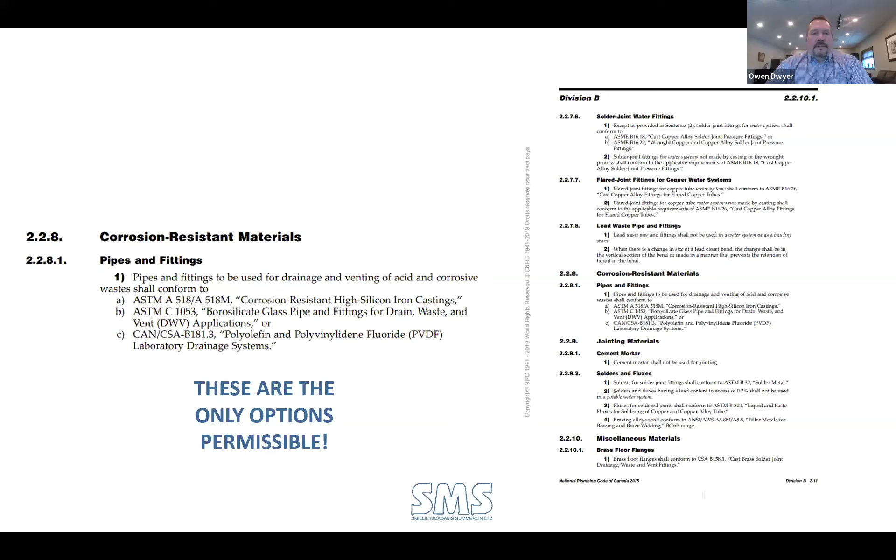Great, thanks Mo. So just to jump right in, what does the code say with respect to corrosive waste in our national code? Essentially, on the left-hand side is the blown-up version. In our 2281 in Ontario, it's 7281. But essentially, it says pipes and fittings that are going to be used for the drainage and venting of corrosive waste shall conform to, and shall in our code means must.

So A is the silicon iron castings, that's a material. B is ASTM C1053 borosilicate glass, and C are your CAN/CSA-B181.3 plastics, so your polyolefins, your PVDF material. Full stop - those are the only permissible options if you are doing a DWV system here in Canada that has corrosive or acid wastes. Again, A, B, or C, and I'll reference A, B, and C in future slides.

Venting also elaborates into venting in 2553. Venting for drainage or dilution tanks that are conveying corrosive waste shall extend independently and terminate in outside air. See Article 2577, I'll get to in a moment. This section points to the separation of corrosive waste from your sanitary system. At one point, you used to be able to tie your corrosive waste vent into your sanitary, but what they found is that your corrosive vent would just condense again into liquid form once it was inside the stack, and it led to further corrosion. So at this point, if you are venting corrosive waste or your dilution or neutralization system, they terminate in outside air.

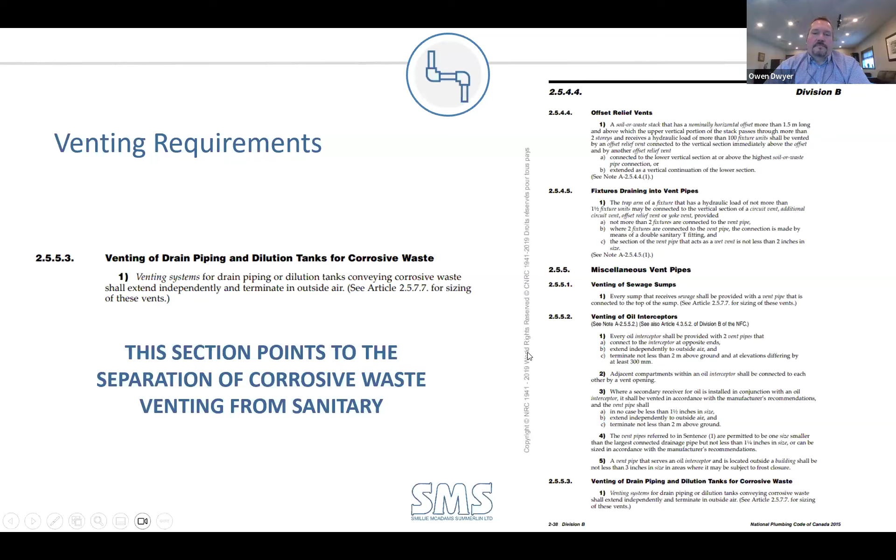2577: venting for sewage sumps, dilution tanks and neutralization tanks are used interchangeably within the code. They are considered to be the same thing. I'm going to go through why they shouldn't be considered the same thing, but for the purposes of discussion, if you see dilution tanks in the code, it's referencing neutralization as well. The second point is the most important: the size of every vent pipe in a sewage sump or dilution tank shall be not less than 2 inches and does not need to be greater than 4 inches. So there is no 1.5-inch venting. You do have to vent a neutralization or dilution tank, and vent sizing is stipulated there.

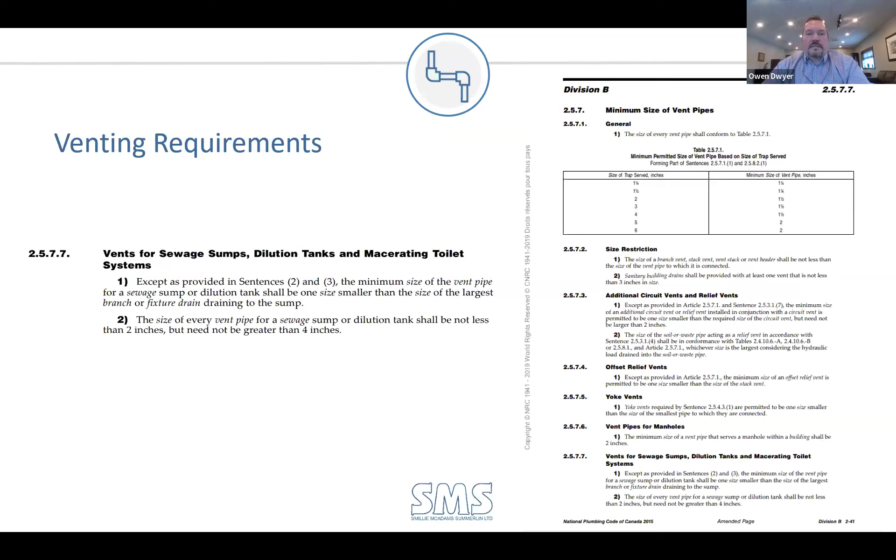So again, referencing back to those A, B, C types of pipe that were selected or referenced at the beginning of 2281.

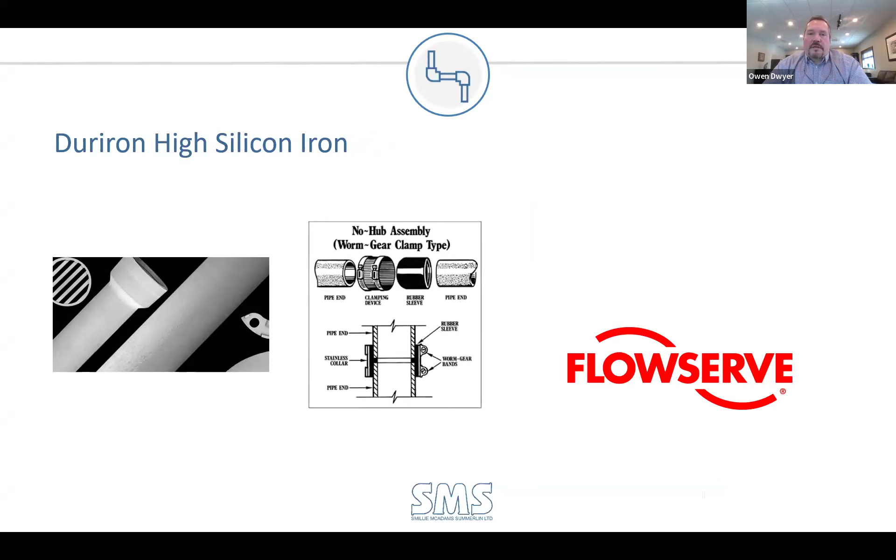Duriron is a product you may know if you've been in the industry long enough, where you've come across it in older master specs. Flowserve was the corporation that produced this material, somewhere in the northeastern US. It was a no-hub style connection system that kind of looked like cast iron, but it had additional silica sand in its recipe, giving it the ability to withstand more chemicals. Unfortunately, or fortunately, in April 2016, it was discontinued.

It was the inception product almost 100 years ago. Again, with that additional silica sand in the recipe, it gave it the ability to withstand corrosion. It's no longer available, but as you can imagine, like a dinosaur bone, every once in a while they get dug up on an old job site, and now we can't add to the Duriron system.

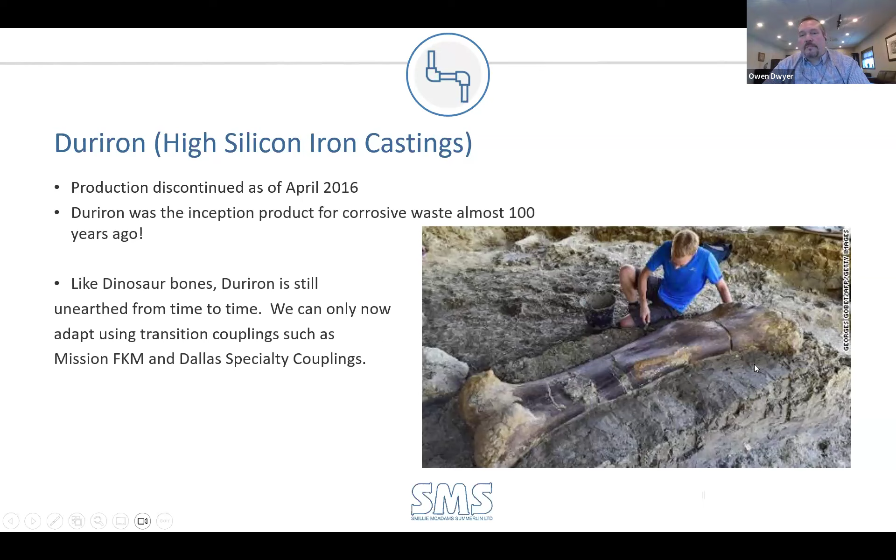We now have to adapt to those. So using transition couplings such as Mission FKM or Dallas specialty couplings, we can do those transitions and still be code compliant.

So B of that A, B, and C is borosilicate glass. It's under the non-combustible piping umbrella, similar to copper, cast iron, any of your metals in a building. So it comes with its set of fire stopping traditions and whatnot.

But the acid waste borosilicate glass, most people don't know, is made by skilled tradespeople. So unlike cast iron that comes out of a casting, or plastics that come out of a mold, every single glass fitting is made by a skilled tradesperson.

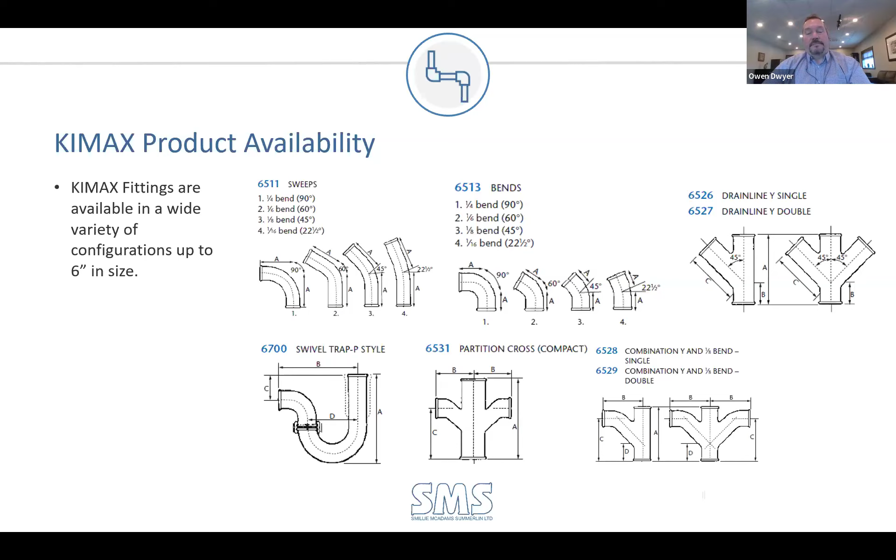They'll take a small section of glass pipe using heat by a torch and jigs. They will bend 90s, 45s, and using carbon rod, they will make the shapes required for a standard plumbing system, be it a TY or a 45-degree elbow, et cetera. So there's some cost involved, and we'll talk about unit value comparisons later on.

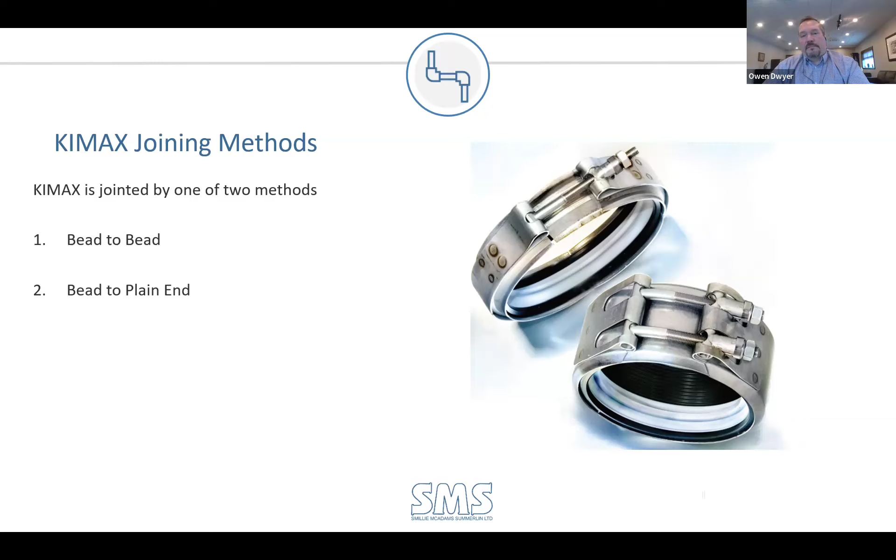The way glass is joined is with a stainless steel kind of jacketed fitting, and the white part you see in those two fittings is Teflon. And if you can see from the next slide, there's a bead to bead coupling and a bead to plain end style coupling.

So what does that mean? All the pipe ends are beaded, or the fittings are beaded, and that's where you would use a bead to bead coupling. For example, if you're cutting a piece of pipe, they come in 10-foot and 5-foot lengths, so a field cut is going to have a plain end now. The bead to plain coupling is what you would use in that scenario.

Because glass and other materials I'm going to talk about shortly, polypropylene and PVDF, are made to iron pipe size, this bead to plain coupling can also be used as a transition fitting.

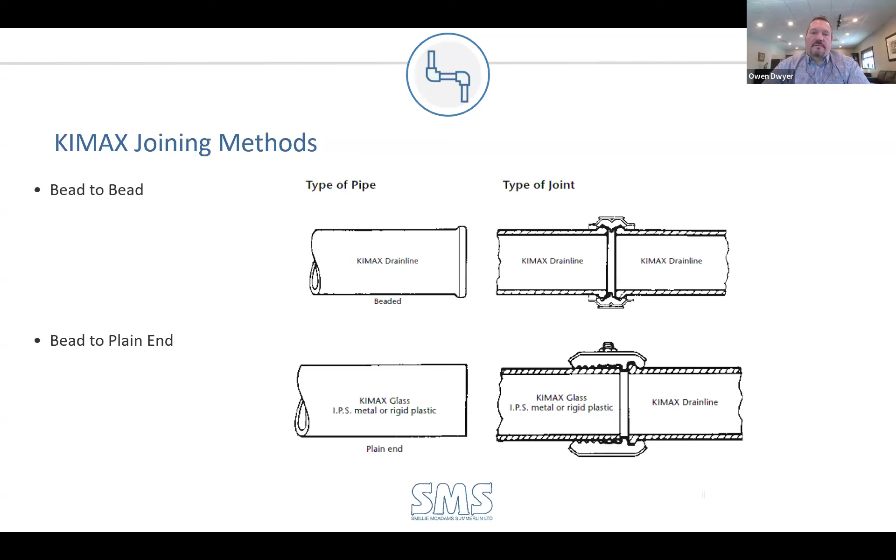So we've covered the A of that 2281 of A, B, and C. B is the borosilicate glass. A is the Duriron product that is no longer available. Just to note, if you look through your master spec and you do have Duriron listed, take it out, it doesn't exist anymore. You're going to create some problems for yourself.

So what's left is borosilicate glass and the CSA 181.3 polyolefins that fall under that C bullet point, if you will. So plastics, those plastics for corrosive waste.

Back in the mid 1990s, plastics were introduced into this corrosive waste. And as we know, plastics are considered combustible. Some special provisions had to be made to accept or allow polypropylene in combustible applications, and those are pointed out in this next slide.

31516, this is specific reference to the OBC, but it's also in the national codes as well. So 3.3 here that's highlighted: polypropylene pipes and fittings are permitted to be used for drain, waste, and vent for the conveyance of corrosive waste, and to distribute distilled or dialyzed water in a laboratory or hospital, provided that the building is sprinklered.

So if you're doing an older building that is a retrofit and it does not have any sprinklers in the building, polypropylene is not a permissible product for a corrosive waste application under that scenario.

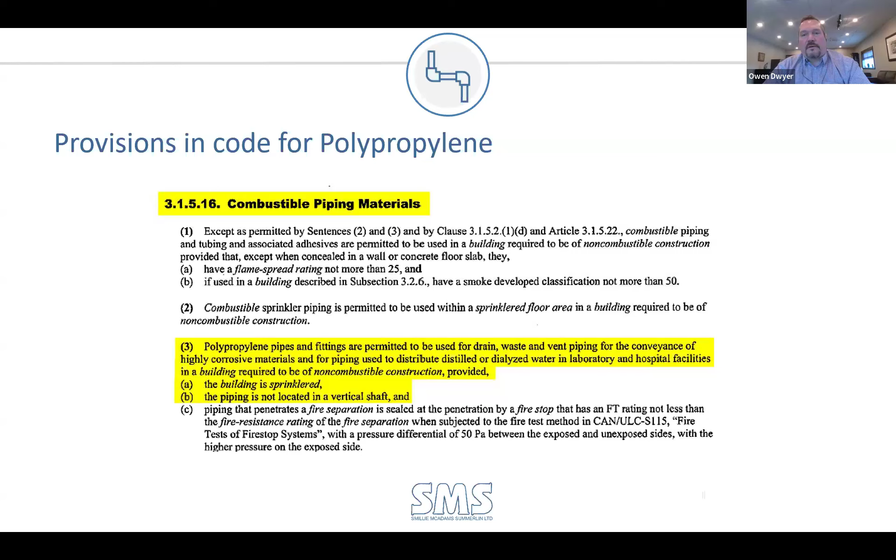So there's various plastics, various plastic manufacturers, different bells and whistles, how they go together. Unlike glass, where you have a bead to plain or a bead to bead, in the plastics you range from different materials like polypropylene or PVDF. I'll touch on PVDF shortly, but you have different manufacturers with different joining methodologies.

One thing to note in your spec is just to say it must comply with CSA 181.3. That's kind of the catch-all for all parties in play. I'll just go through real quick on the systems. So polypropylene, you're typically talking about a flame retardant polypropylene.

Just to drop some trade names, IPEX trade name for that would be either Enfield or Labline, regardless of their joining method. You would have a Watts system, which would be either blue line, their non-flame retardant would be brown line. So be careful of using those trade names in your specifications, because you're going to knock out other viable products.

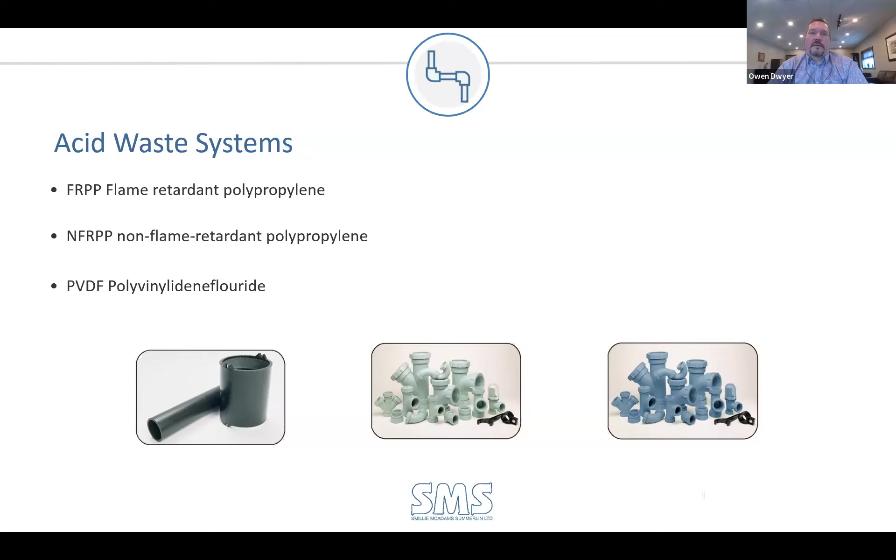Again, I reference that 2281 standard that spells out CSA B181.3. And finally, PVDF. PVDF is a thermoplastic as well that carries properties similar to, if you're familiar with PVC XFR from IPEX, for example, it meets flame and smoke. So if you have an application where you did have a flame and smoke requirement, going back to the analogy of a building without sprinklers, if you wanted a plastics option, PVDF would be the only requirement left on the plastics option for corrosive waste or glass.

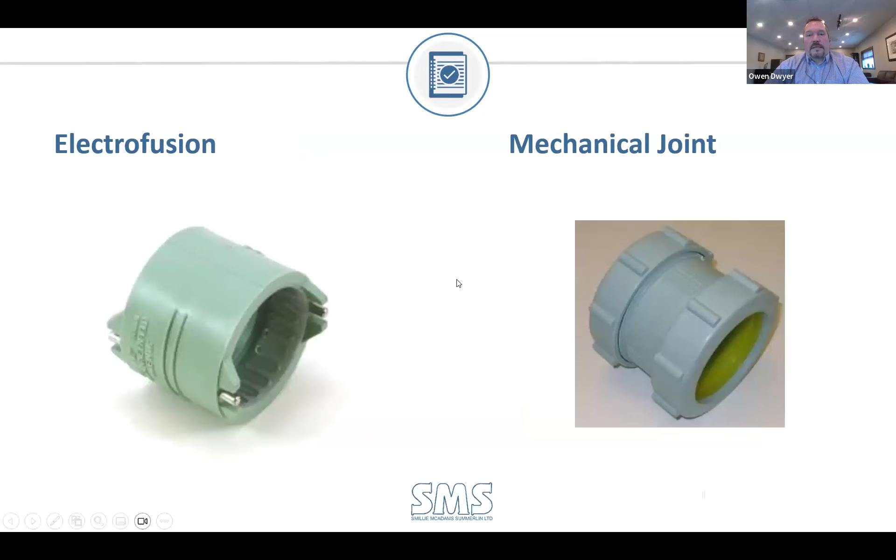So in most systems, you have either a fusion or a mechanical joint. Fusion is predominantly what's used for below grade applications. Mechanical joint is typically for your below the bench, accessible areas, for obvious reasons, but it's recommended to go with fusion for the maximum extent possible. And again, I just wanted to point out that we're only talking drainage here. This is not for the conveyance of chemicals in a pressure application.

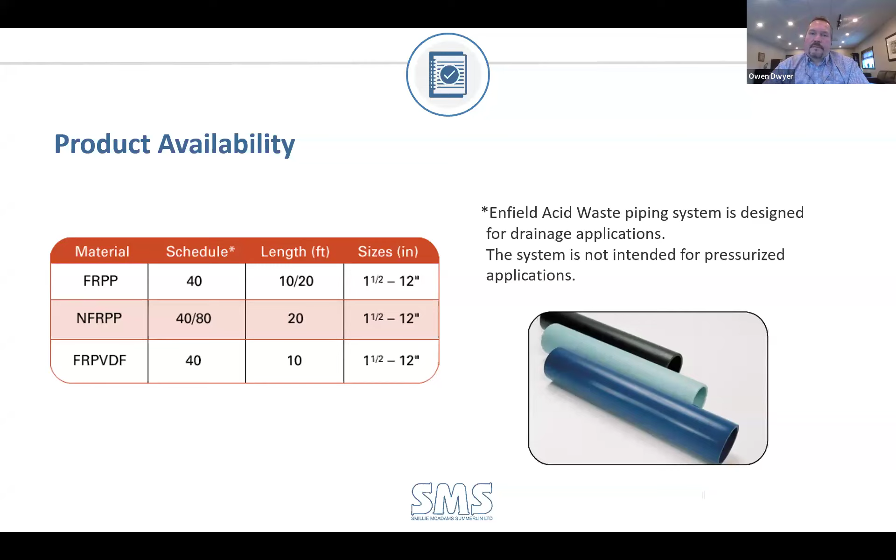Most manufacturers list their products available from 1.5 through 12. Some manufacturers list up to 16, but again, not very common, and that's likely a fairly long lead time coming from Europe, likely.

Unit value comparison: if glass was our control factor with a unit value of 1, that PVDF product would have a unit value of about 0.75, and polypropylene 0.35. So that said, in your specifications, you should try to look towards polypropylene as the viable option for the situation, taking into consideration chemicals, temperatures, sprinklered buildings, plenums, etc., just based on cost value alone, and then work from there.

You can see why the Duriron went the way of the dodo bird over the years. It's 3.5 times that of glass, or 10 times more than the available polypropylene plastics options today. So again, just for quick math, if you've got $1 million of pipe and fittings in a glass project, that's a $350,000 comparable takeoff in polypropylene.

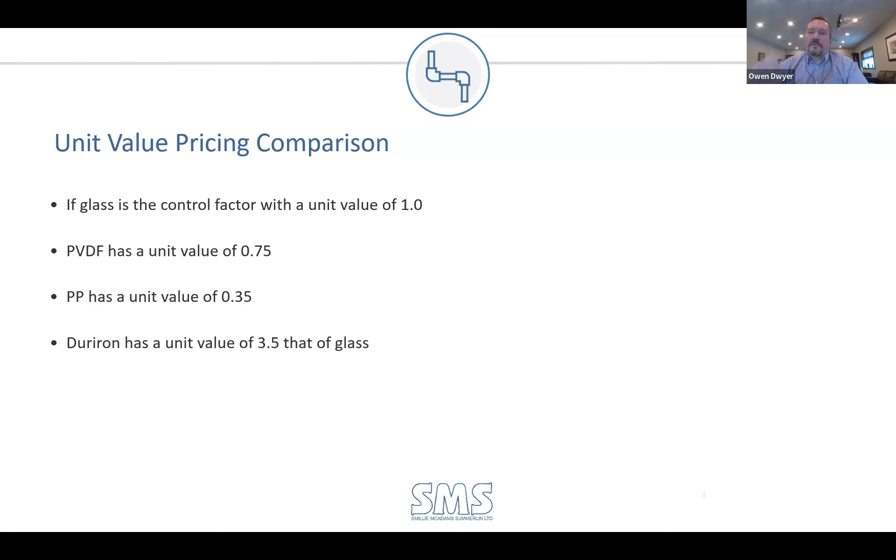As far as ticking those boxes, you're trying to produce a viable solution for a client. Polypropylene should be the first product that you consider. Also taking into consideration plenums: plenums would be PVDF and glass, not polypropylene. Sprinklered buildings would permit polypropylene. Unsprinklered buildings would not permit polypropylene. So then again, you're left with PVDF and glass as your only two viable options.

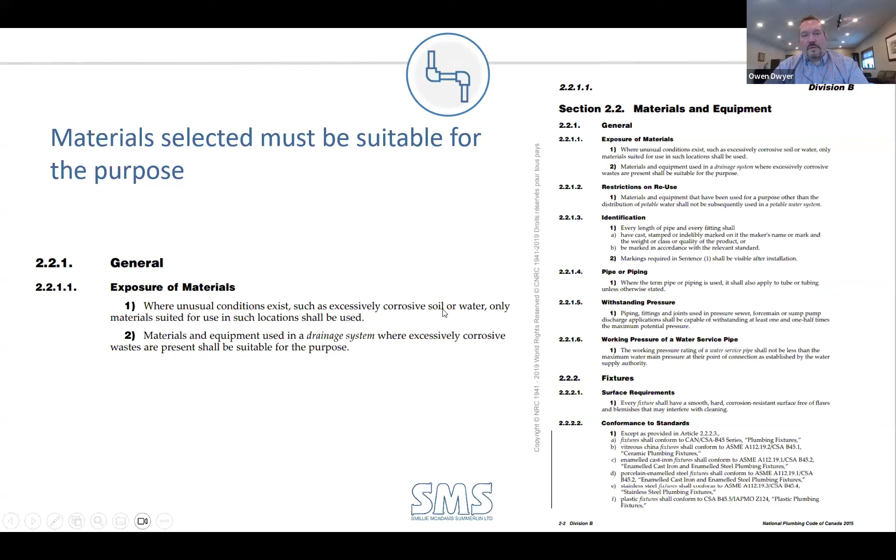So, corrosive waste. It talks about all of the A's, B's, and C's that we went through. But in 2281, as a general catch-all in our code, it talks about materials and equipment shall be suitable for the purpose, which makes sense. So at no point do you put glass connecting to a PVDF product and then use a standard Fernco coupling, like a standard rubber jacketed coupling, in these applications. Everything has to be suitable for the purpose, as per 2211.

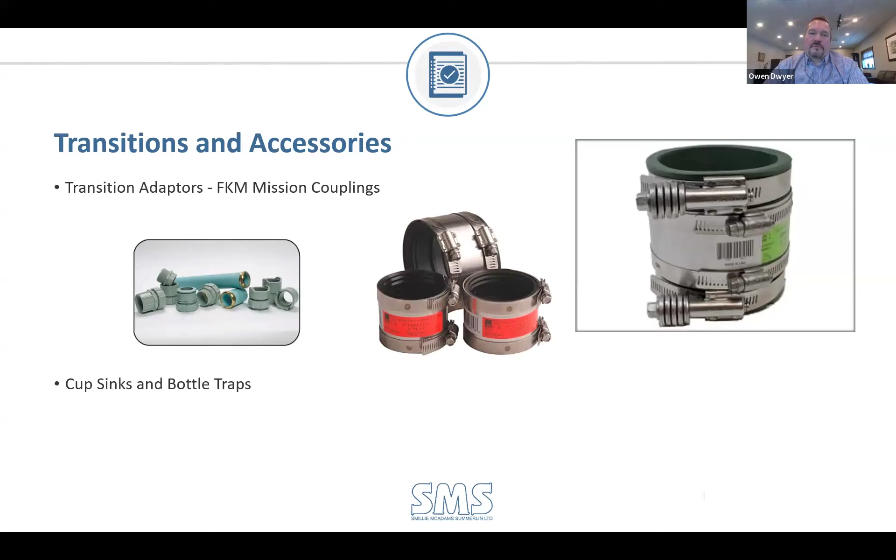The proper transitions are similar to what I mentioned before, like a mission style coupling, a Dallas specialty coupling. There's specialized rubbers that are used in high temperature and chemical applications. Make sure it's suitable for the application. And just in general, there's other accessories available like tailpiece adapters, cup sinks, bottle traps, etc.

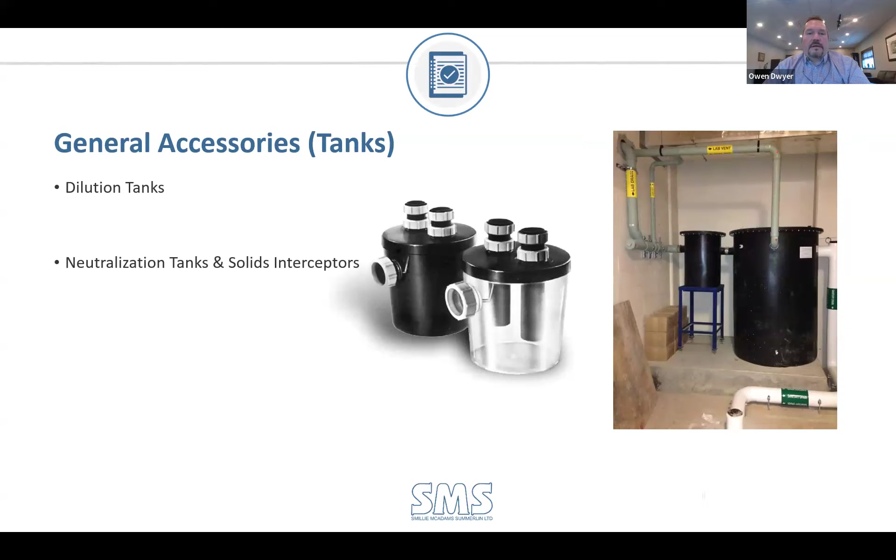Staying on the general accessories, you have smaller tanks, you have larger systems. Neutralization systems are a requirement, solids interceptors, and pH monitoring. So the next part of the presentation is going to go into the neutralization part.

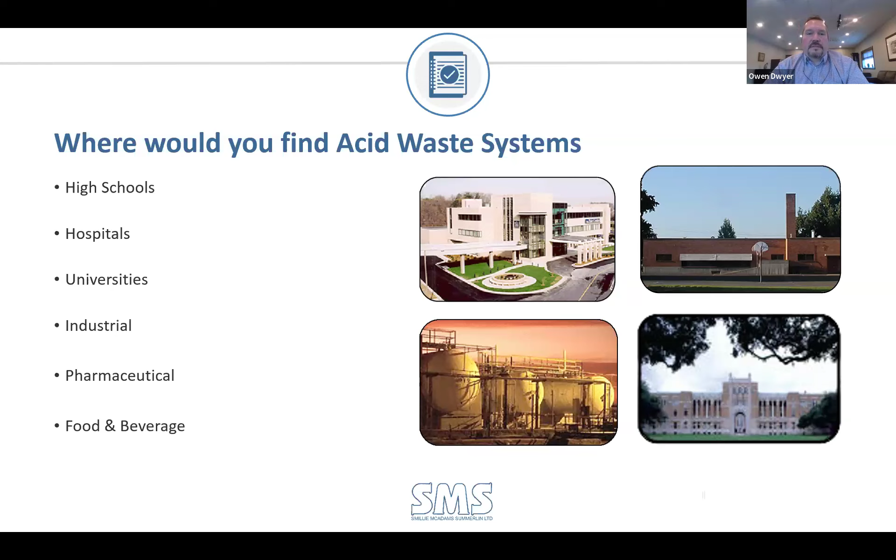As a kind of a shock, there's not much to say in our code with neutralization. So that's kind of the meat and potatoes of this presentation that I'd like you to take away with you today. Where do you find these corrosive waste applications? Typically high school laboratories, hospitals, research type university facilities, industrial pharmaceutical applications, and food and beverage. Anywhere where you've got an excessively corrosive DWV system that's connected to sanitary, these are the applications.

So why do you need to use it? Because it's a requirement, a shall conform to A, B, and C. These are your three options: polypropylene, PVDF, or glass. You have a complete product line where it's combustible, non-combustible, plenum, shafts, etc. Chemical resistance, all of that needs to be taken into consideration. Again, reiterating 2281, shall conform to A, B, and C. You can't use stainless. You can't use CPVC. You can't use PVC, or whatever other material that somebody is proposing that you should consider. Our code is pretty black and white when it comes to DWV applications for corrosive waste.

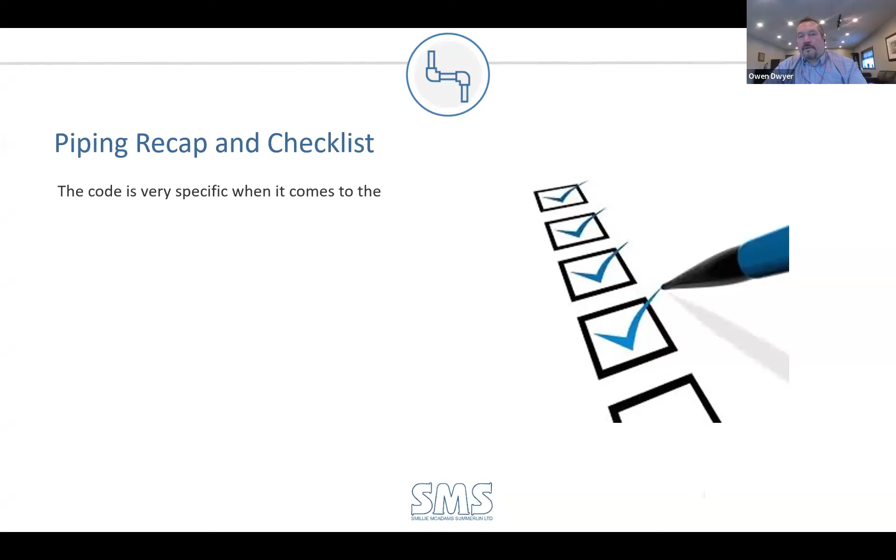So the neutralization part of the presentation - how am I doing for time? Good. It's quite important, so I'd like to spend a little more time there. That's why I'm not rushing through. As a quick review on piping, it's very specific when it comes to requirements for corrosive waste.

2281 covers your A, B, and C pipe requirements. 31516 talked about the combustible pipe restrictions and the provisions made for polypropylene in a sprinklered building.

3643 talks about plenum requirements, that's flame and smoke. For venting, 2553 talks about venting independently into open air - you don't tie into sanitary. Vent size requirements: shall not be less than 2, need not be greater than 4 in general, as well as for your connections to your neutralization dilution tanks.

Any plumbing system also takes into consideration vertical shafts, fire stopping, slope, etc. So in the grand scheme of things, all of that is standard fare for a corrosive waste system. You just have to make sure you're selecting the right material of the three - polypropylene, PVDF, or glass - for the application, again considering plenums, shafts, chemicals, temperature, etc.

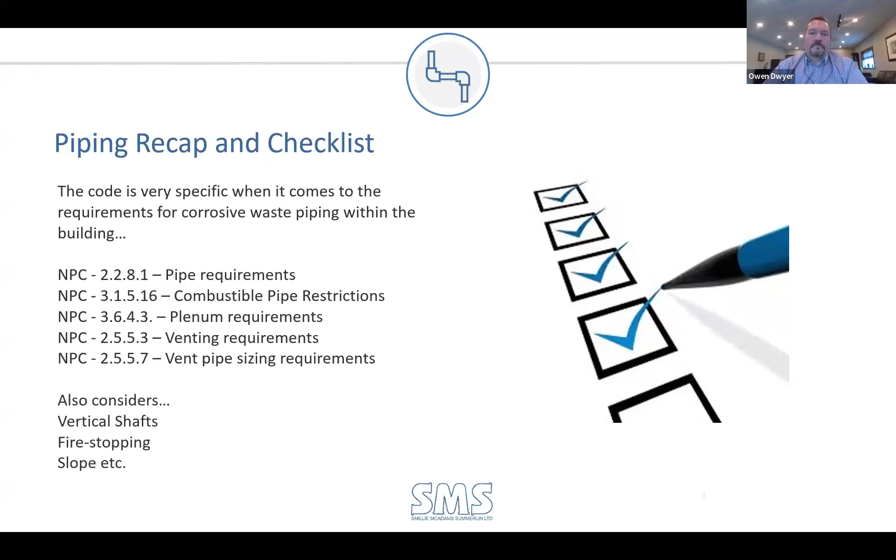So as I mentioned, when it comes to neutralization in the code, this is what we're given. In 2444, where a fixture or equipment discharges corrosive or acid waste, it shall - in the code, shall means must - discharge into a neutralization or dilution tank that's connected to the sanitary drainage through a trap or an indirect connection.

Part 2 is what I've always banged my head on the wall about: neutralization and dilution tanks shall have a method for neutralizing the liquid, period. It doesn't give you anything, no references to anything. The important point is there is no standard - no CSA standard or anything that these manufacturers have to conform to.

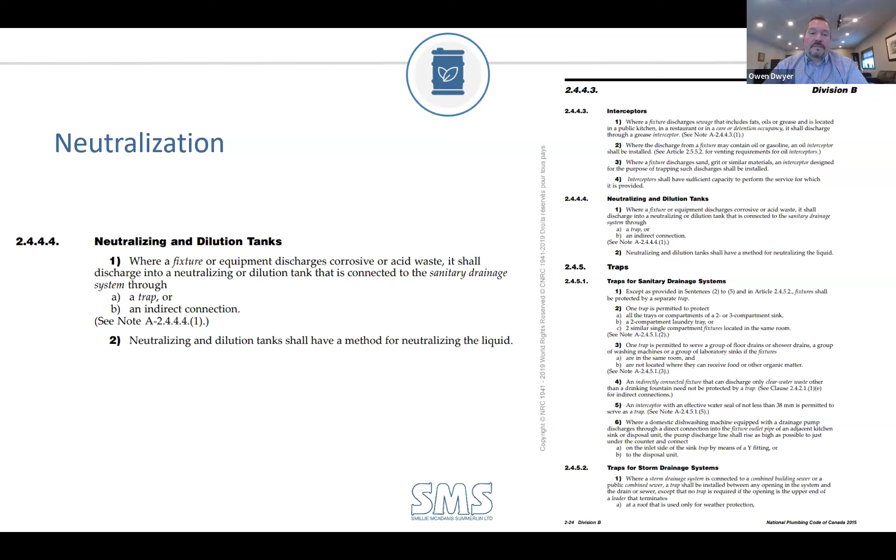So what does that mean for all of us? These are engineered and engineered design systems. So it's up to us in the industry to make sure these tanks are designed for the application at hand.

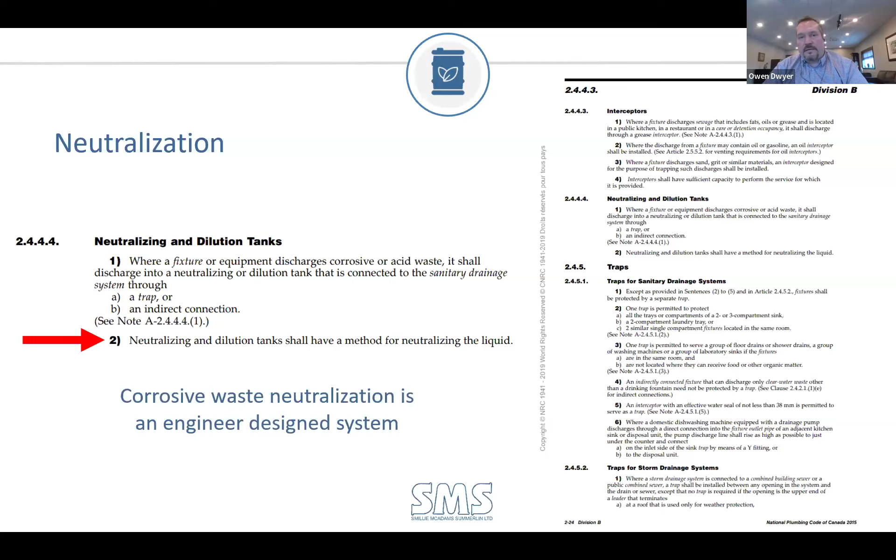So let's pull back a little bit. What is corrosive waste? It's set by sewer use bylaws. Every municipality has a specific bylaw with respect to permissible discharge limits, be it temperature, solids, chemicals, and whatnot - anything that's going to be harmful or detrimental to the aquatic environment, to persons and so on. These bylaws not only govern the level of pH, but they also impose fines.

The way they typically do it is through sampling. If they have a suspect facility, they do grab sampling where they'll take a sample from the catch basins outside the facility and test to see if the pH is within permissible parameters the bylaw sets. If not, that gets flagged, and then they'll do 24-hour sampling as well. Those fines are hefty - if a facility is found out of compliance with municipal bylaws, those fines are quite substantial.

Most municipalities also put in their sewer use bylaws that neutralization by way of dilution is not permissible, and that's for obvious reasons, shortly.

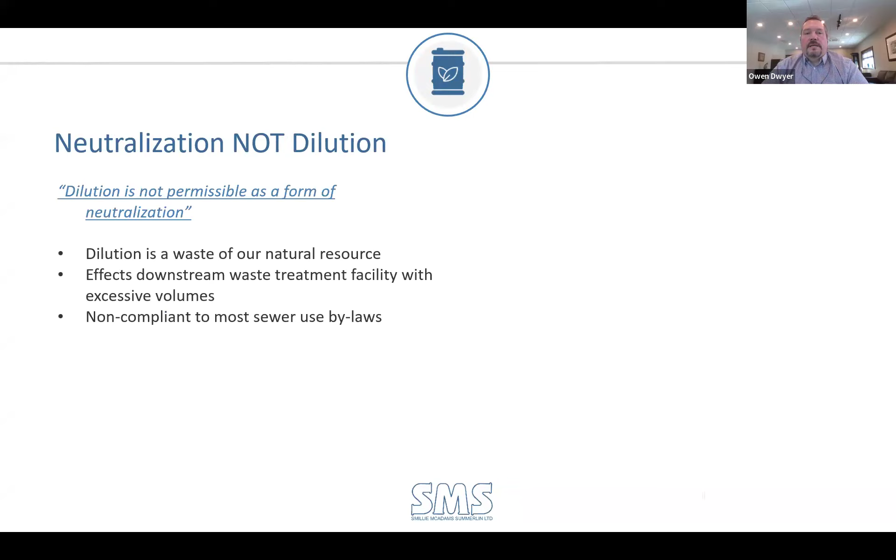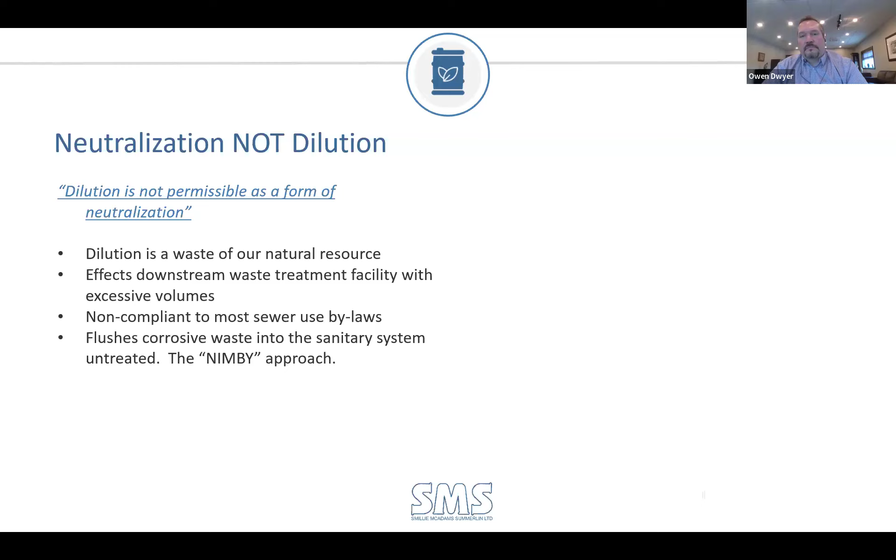Most municipalities consider it non-compliant - they don't want you to use dilution as a method of neutralization. And again, you're not really doing anything. If you're using dilution by forcing water through the system, you're just flushing it out of your building and making it somebody else's problem.

For example, from a 4 to a 5, it's referred to as a decade unit. So every decade unit, or change in those numbers, is representative of a 10 times change in concentration of either acidity or alkalinity.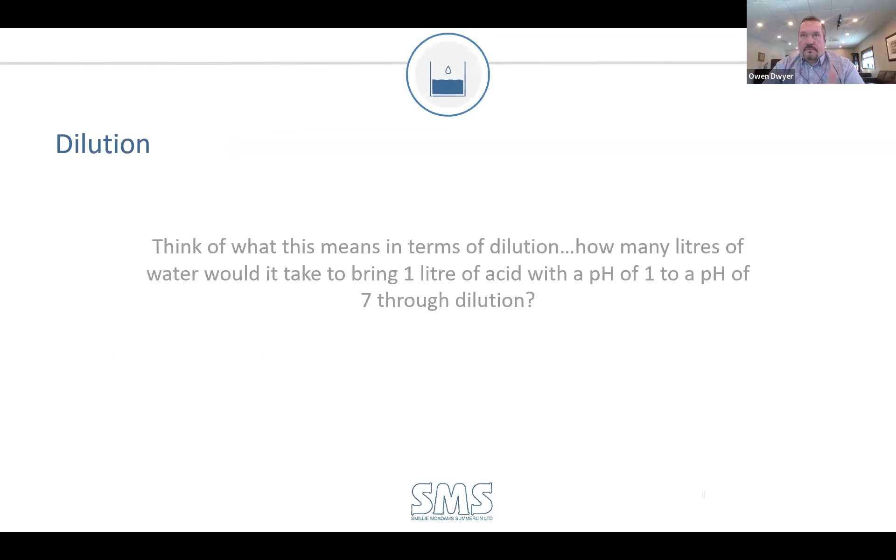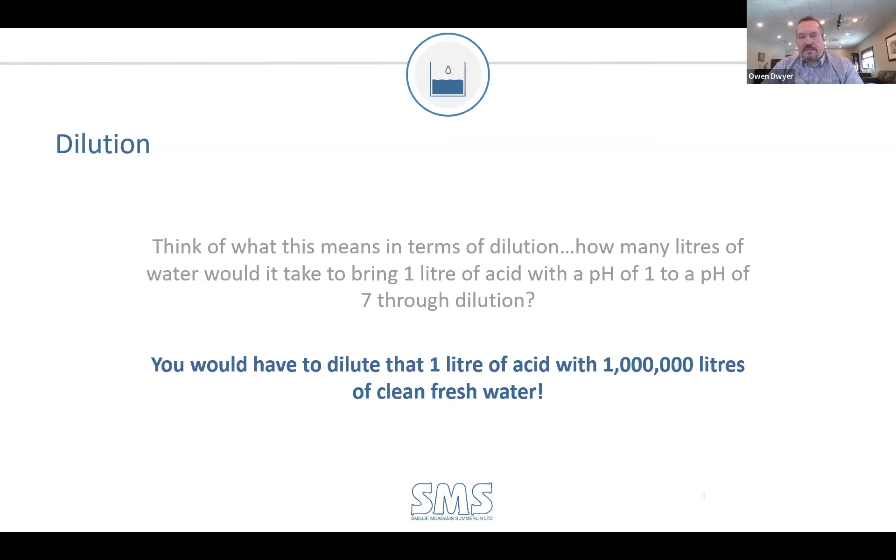If you carry on, say I had an example of 1 liter of acid with a pH of 1, and I wanted to make that neutral, so a pH of 7, following those zeros, it would take 1 million liters of clean fresh water so that pH 7 exact would be achievable. Now, you do get dilution over time, so it's not perfect math per se, but just to give you a visual perspective of what that means: 1 million liters of water is like 50,000 5-gallon jugs, or enough water for 15,000 showers.

So the mindset should not be dilution. We're not trying to add water or flush it out of our system. We want to treat it, and in doing so, treat it on the site, so that when it is discharged from the building, it's acceptable and within the sewer use bylaw parameters.

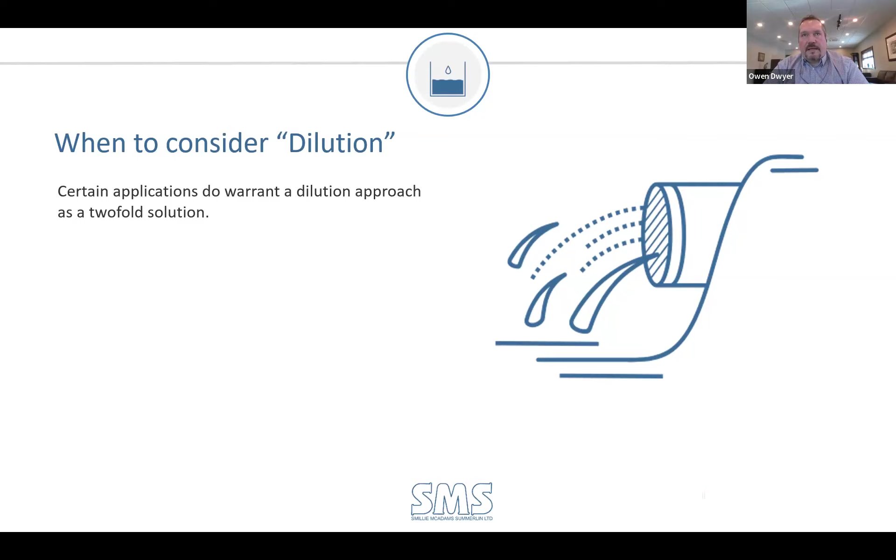That said, in our discussions and scenarios, we found that dilution is the answer for some applications, like dialysis waste. Dialysis waste is acidic, ranging from a pH of 4.5 to 5.5. If it went directly into the system, it would require treatment in large volumes. However, it's viscous, kind of like the consistency of thick latex paint, and it would become detrimental to a limestone system.

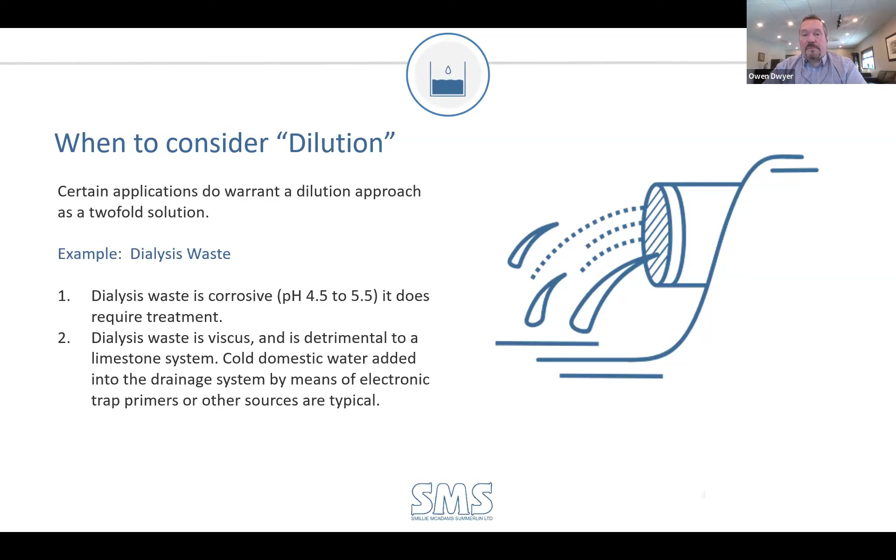So if you have a gravity-fed system with calcium carbonate limestone, which we're going to talk about shortly, dialysis waste would render that limestone system dead and useless, because it coats all of your limestone, or because of its viscosity would just back up your flow through the limestone system.

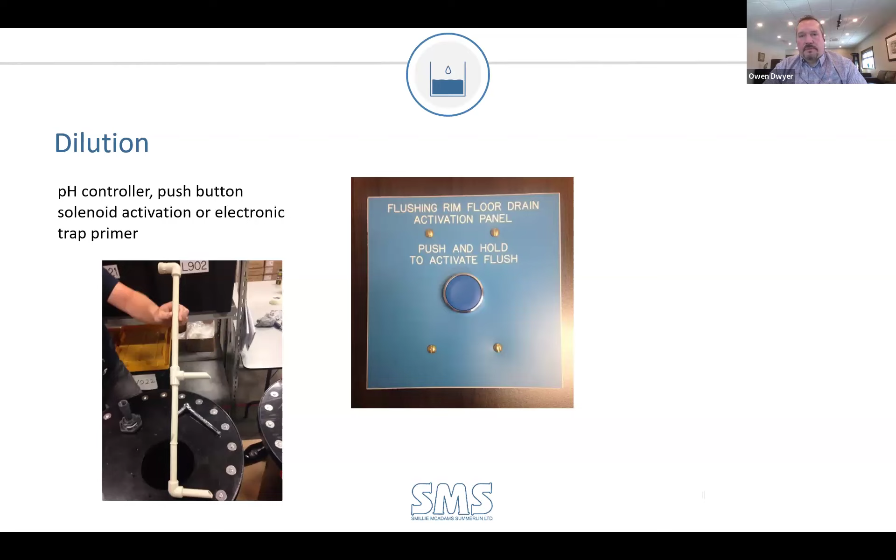So sometimes these dilution systems for dialysis are a push button control system through a flushing floor drain rim style, or a tank with injection ports, again for smaller controllable volumes. But dilution is not necessarily the answer for corrosive waste. If you have a large facility that is predominantly dialysis, you should consider another option, which we'll talk about shortly, which is an injection or a chemical treatment type of system.

Moving on to different types of neutralization: you have passive, which I mentioned, which is your gravity-fed neutralization system through calcium carbonate limestone. The sizing is dependent on contact or dwell time. You want to have that acid content in contact with the calcium carbonate limestone for a specific amount of time in order for that chemical processing to happen.

Because calcium carbonate limestone rock is in itself a solid form, it is in the range of a pH of 12 to 14 if you had to dilute, or liquefy, that calcium carbonate. So it only works for acids. A calcium carbonate system is very specifically suitable for predominantly acidic effluent. You're not going to use a calcium carbonate limestone drainage or neutralization system for caustic waste, for something that's on the alkaline side.

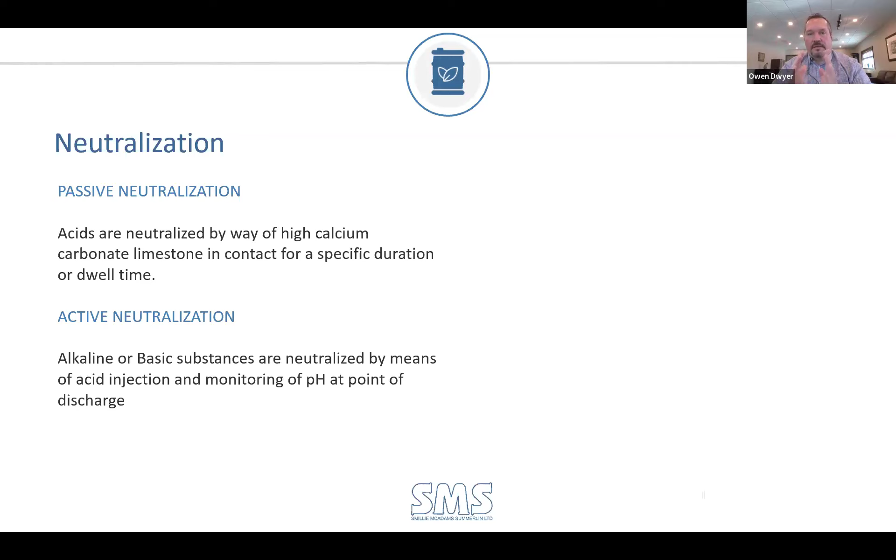Where alkaline neutralization comes into play is an active system. An active system achieves neutralization by way of chemical opposites, if you will. So if you have something that's alkaline, on the 7 to 14 side of the pH scale, you're going to use an acid to get to neutrality. If you have the opposite, an acid effluent, you're going to use something alkaline to get towards that acceptable discharge limit.

Typical laboratories would be predominantly acidic. So your school, university, hospital type applications are going to be predominantly acidic.

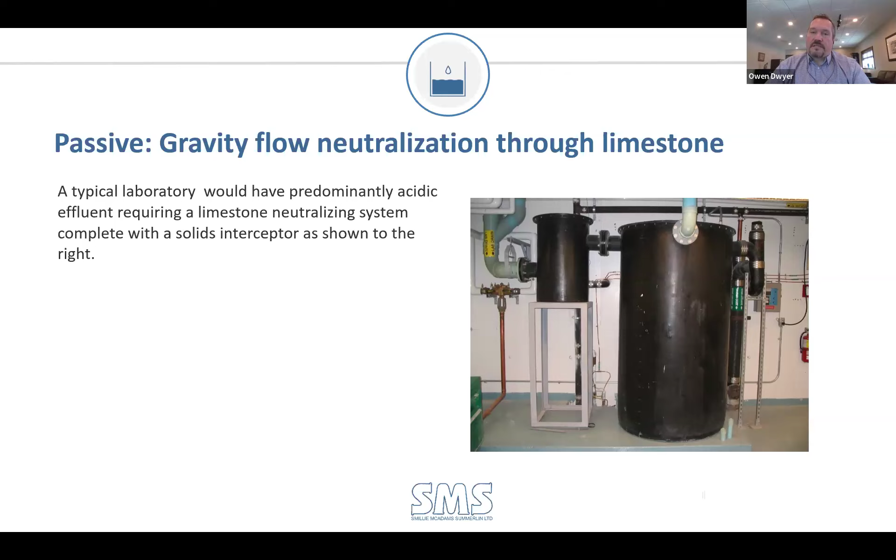Solids interceptors, as shown on the left hand side of that larger tank, specifying details. Again, these are engineered design systems. The more information you put in your spec, the better it is for all parties because it gets rid of the ambiguity, and again, putting in the detail circumvents substandard material being put in.

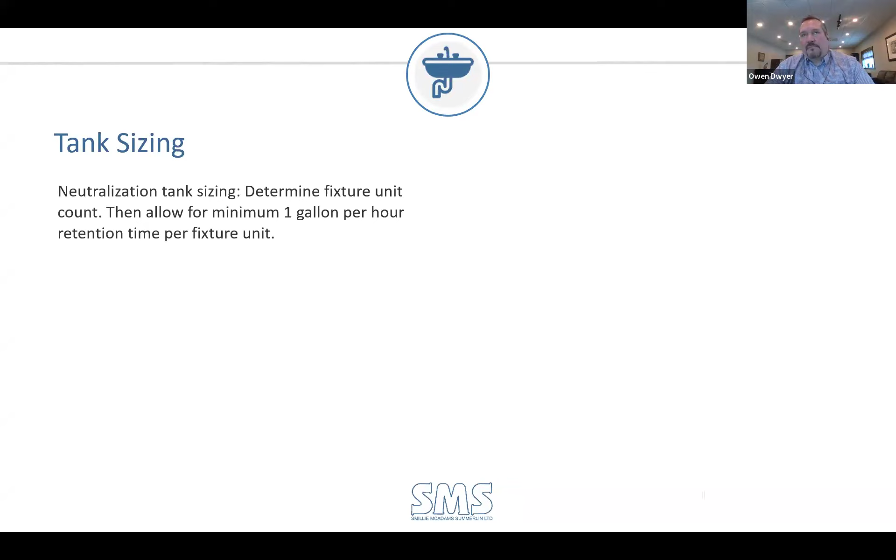So I'll talk about the interceptors shortly, but a very quick overview on how to size a gravity-fed neutralization system using limestone, based on fixture unit counts. We allow for a minimum of 1 gallon per hour per fixture unit in the system. So what does that mean? I have sinks, eye washes, floor drains, emergency showers, glass washers, all of that.

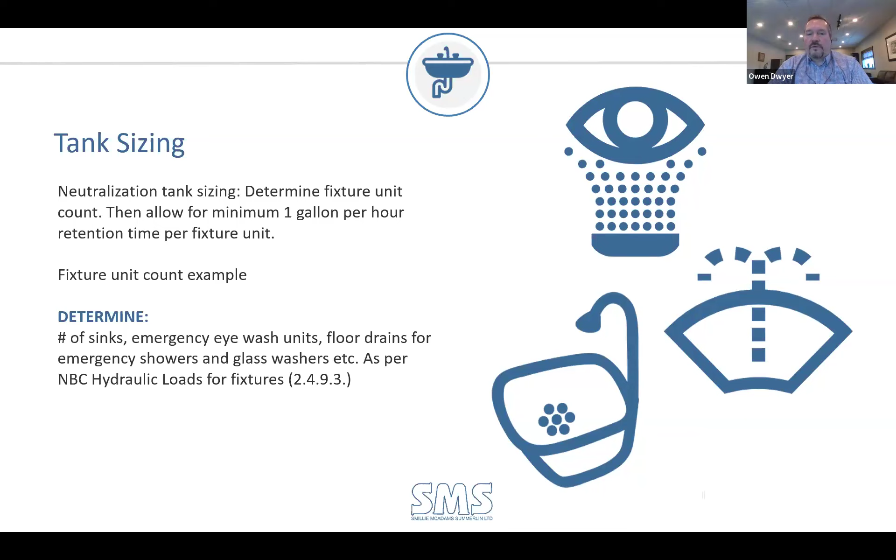So as per our National Building Code 2.4.9.3, the hydraulic loads for fixtures kind of looks like this. Lab sinks would fall under other sinks, of which are 1.5 fixture units.

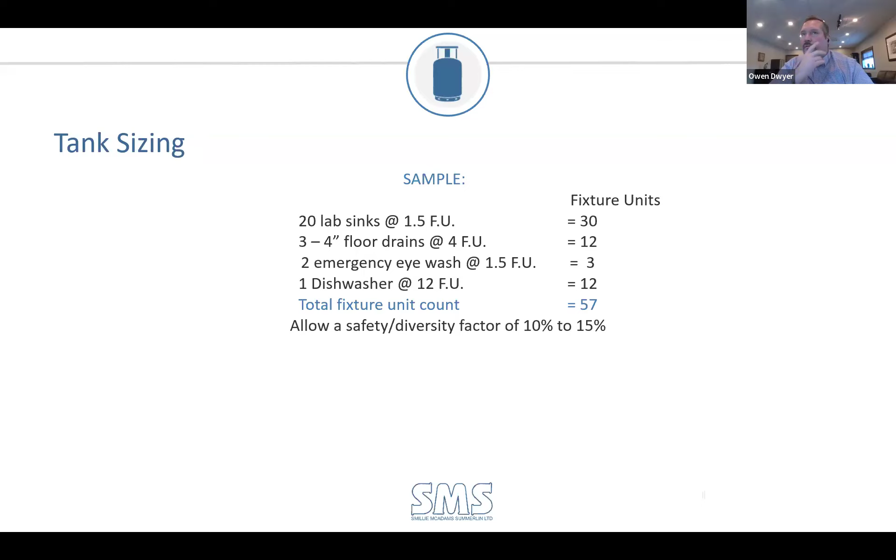So a very quick example. You've got a small lab, 20 lab sinks, 1.5 fixture units per sink. Total fixture count, you add up. So if you're tying in your floor drains, your emergency equipment, your dishwasher, etc., you're adding up all of your fixture units, adding your safety factor, 10 or 15%, and it gives you a number. So what is that number?

That number is actually your functional capacity. What volume of liquid does my tank need to hold under these parameters? So this calculation spits out 62.7 to 65.5. So when selecting a tank, you want to have a functional capacity of 65 gallons.

So there's a hole in my bucket. I keep mentioning functional capacity. So take, for example, a Home Depot 5-gallon pail. If you drill a hole in one side for an inlet, drill a hole in the other side for an outlet, drill a hole for a vent, and then you fill it with rocks, why call it a 5-gallon bucket?

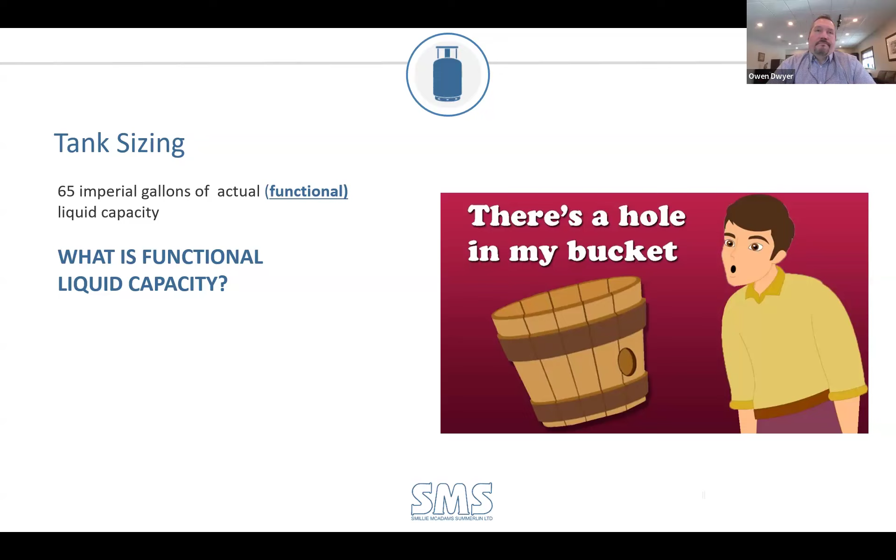That's an irrelevant volume. In its unchanged form, it is capable of holding 5 gallons. However, for purposes of discussion and design for neutralization systems, it's best to design the system and reference its functional capacity. So that 5-gallon Home Depot analogy, that may only hold 2 gallons of water. Just take that into consideration when you're doing a comparison between one supplier, for example, and another. Make sure that it is a comparable functional volume.

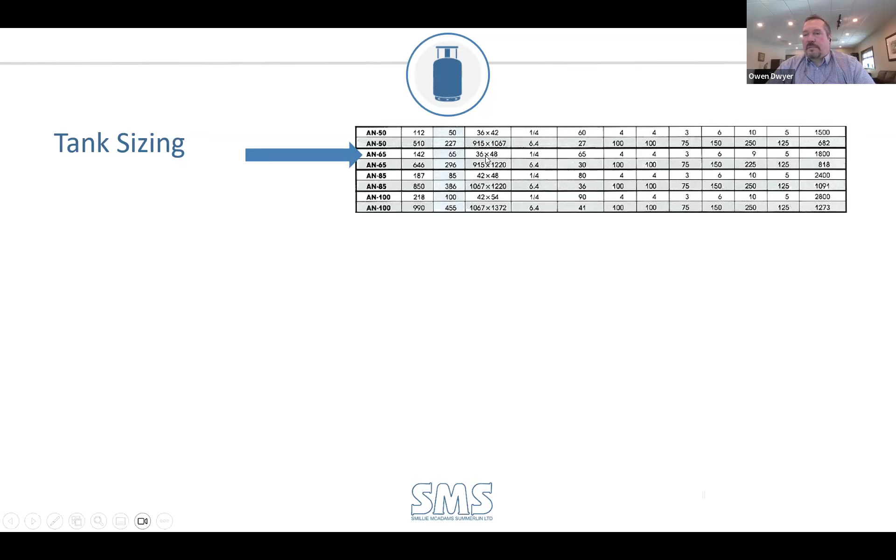So going back to our sample, a 65-gallon tank would be approximately 36 by 48 diameter. So empty, it's 142 gallons, but again, that's an irrelevant number. I want that tank to hold 65 gallons of liquid. That comes with a diameter approximately 36 by 48. Another detail to put in your spec.

A typical system would look something like this. And what we recommend, if you're not going to specify a solids interceptor, you can see why they're highly recommended, is because now you have a 36 by 48 inch tank, and that tank itself, if you look on the far right hand side, requires - it doesn't say on this graph, I apologize - approximately, let's call it 1,800 or 1,500 pounds of calcium carbonate limestone. So if this dip tube were to become blocked with whatever the students or staff were putting down the drain, now you have a problem.

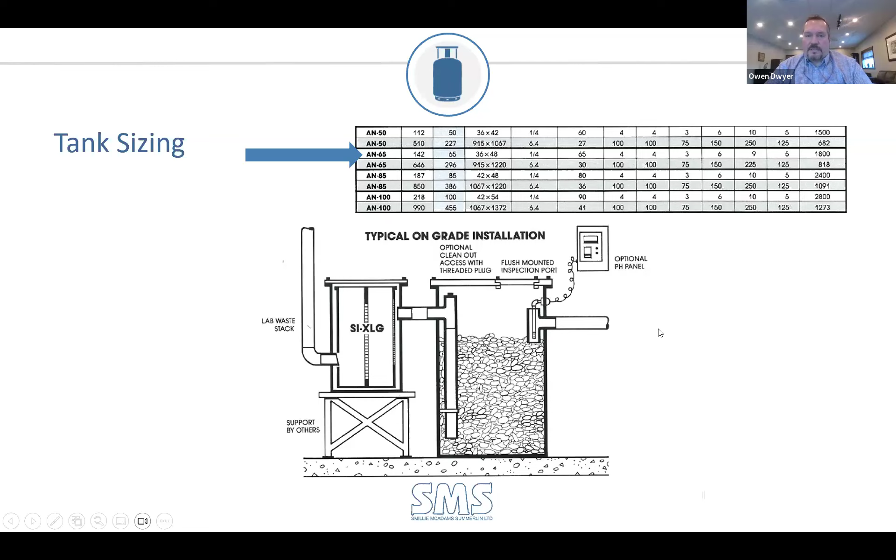You've got to get by 1,500 pounds of stone to access that small dip tube. So the interceptor prevents that, and at the very least, or in addition to, add a clean out on the top of your dip tube, so you can actually have the ability to service that in the event of a clog.

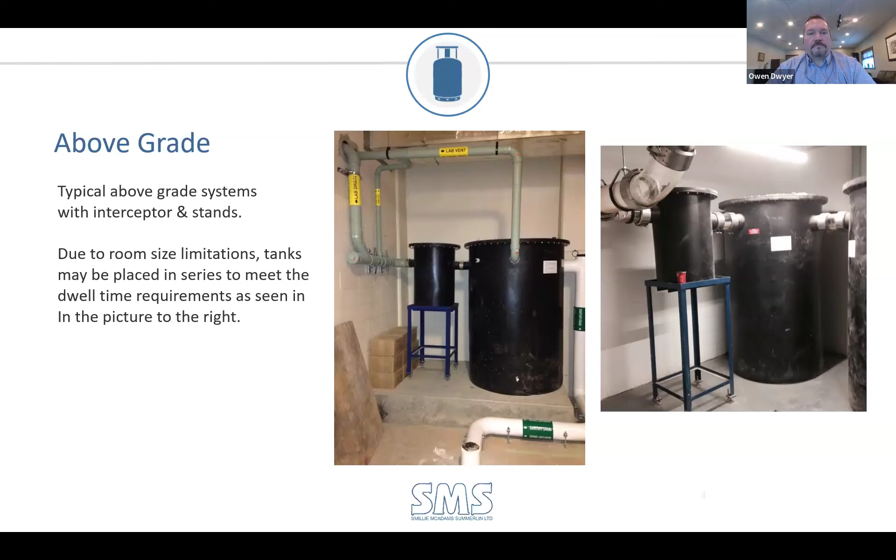Flush with floor. The same type of scenario with limestone, you can do with a flush-with-floor assembly. Again, you have a functional capacity you're aiming for, depending on the thickness of your slab and the depth of bury.

You have to maintain that liquid level as your outlet. That's your functional capacity. How does that come into play? Your developed length. So if, for example, the architect or the building owner says, no, we don't want the neutralizer in this room anymore, can you please put it over in this section?

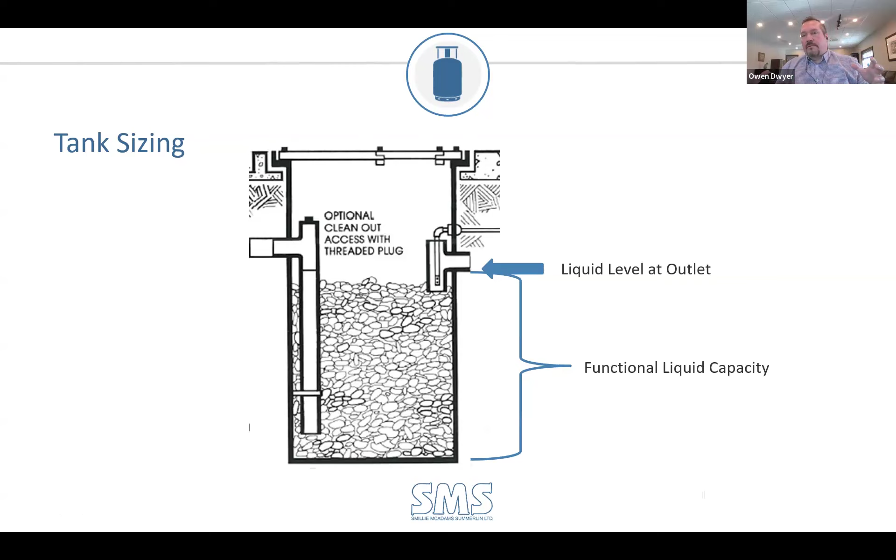Now you've got to take all your piping and maintain your slope. Your tank inlet is no longer here as designed originally, it's now down here, and your outlet's lower. Again, how do you maintain that capacity? What you'd have to do is either change the diameter of the tank and the depth of the tank, etc., to accommodate.

Hi Owen, there's a question here. It says: one of the pictures shown displays two tanks in series. What would the tanks be in series versus parallel?

In series versus parallel, it's hard to direct the flow equally in parallel. So we would always recommend that in a series application, the first tank is going to see more acid activity on the limestone. The second one sees less. Just say for example, roughly speaking, you have a pH of 4 coming into the first tank - its limestone is going to be reacting more aggressively. The second tank may see pH 5, and that pH 5 again gets less active, so the first one might require a little bit more maintenance, but in a parallel system it's harder to control.

Sometimes in a parallel system, it's not necessarily about splitting flow, but it's a redundancy for maintenance purposes. I hope that answered the question.

There's a little tip on the side here that I've put. If it's an existing building and you're adding a new neutralization system to accommodate an expansion, don't forget to consider the door openings. Going back to that 36 by 48 - if you have 32-inch or 34-inch doors, you're not getting a 36-inch diameter tank through those doors. So sometimes that's why it would lead you to a series system if you've got restrictions like that - whether it's the footprint or the doors, the accessibility throughout the facility.

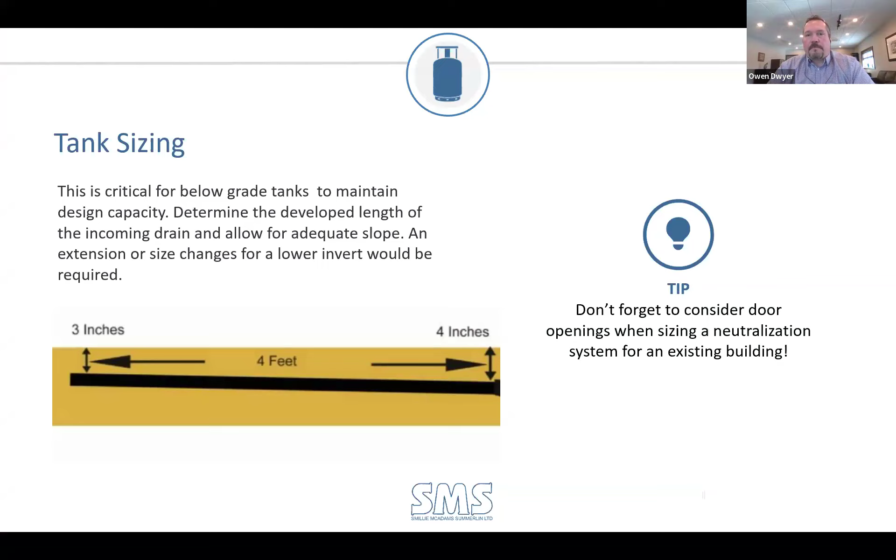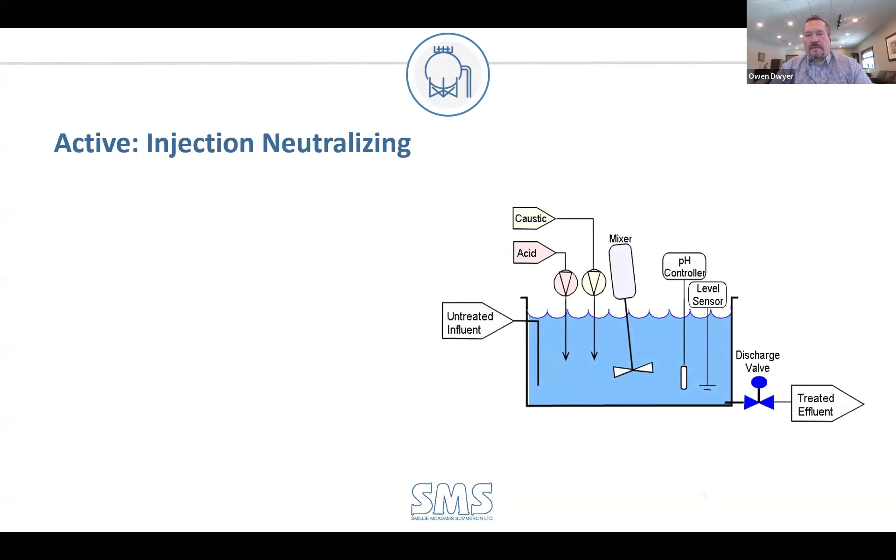Injection neutralization is very straightforward as far as a schematic here. You've got dosing pumps with caustic or acid, or just one depending on the system. You've got an agitator, pH controller, level sensors, all of that stuff. All of that can be connected to the BAS system, and then you have your treated effluent.

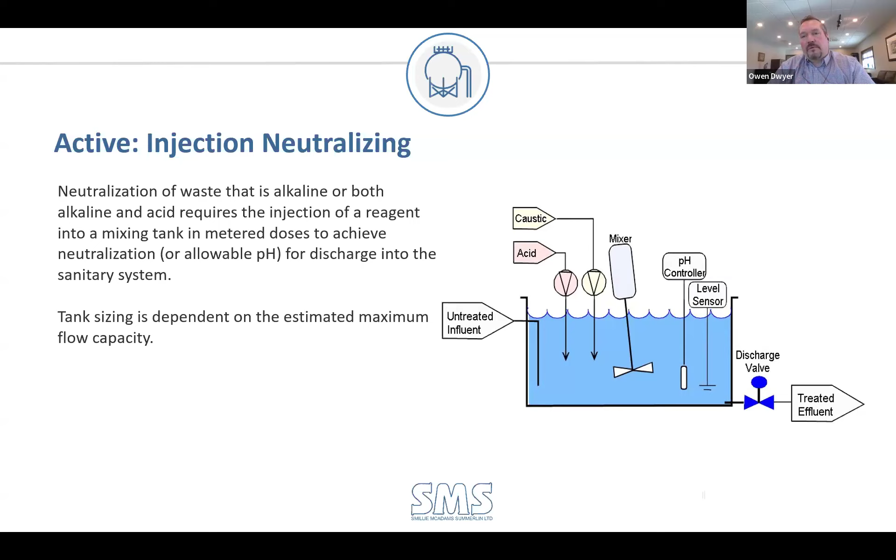Alkaline systems require this type of system, again because limestone does not have any effect on the pH going out. The way we size these is based on estimated maximum flow through the system. As we did before in the gravity fed system, you would take your fixture units - but in an injection system, you would take your maximum anticipated flow rate and add your retention time.

So in your GPM, just say for example, we like to use a 15 times multiplier. Let's go through an example: you have 10 GPM, and I want to hold that 10 gallons coming into my tank for 15 minutes. My tank capacity has to be 150 gallons - 10 gallons per minute times the 15-minute retention time.

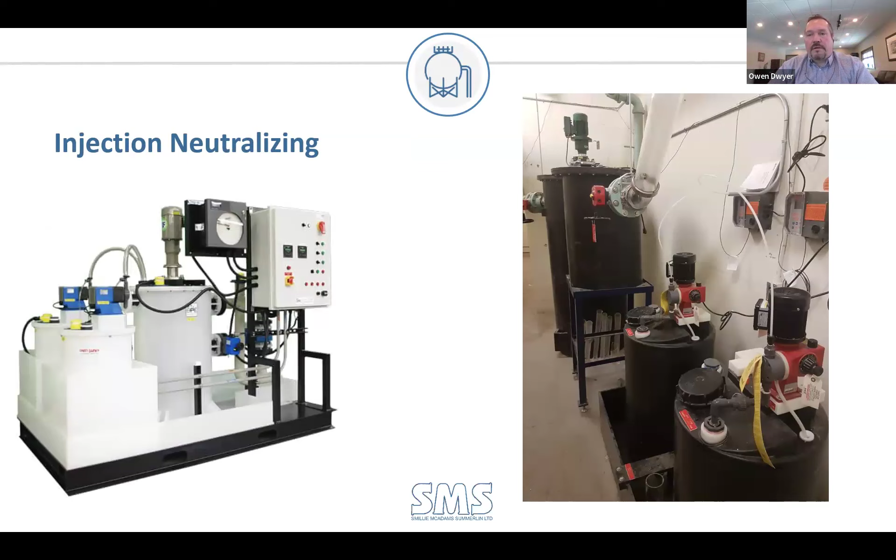You'll see systems such as this on the left-hand side, which is a skid mount with all the bells and whistles, alarms and whatnot, and systems on the right which are individual components set within the facility as required. What they have are caustic and acid pumps mounted over a tank. On the left-hand side, you can see blue pumps mounted on those two tanks inside a spill tray, and then you've got the ones on the right, which are red. Same scenario.

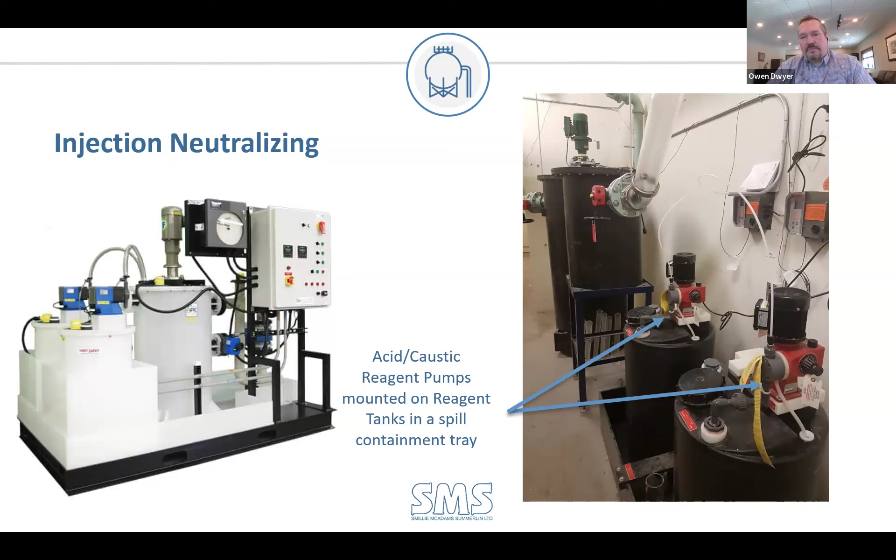I don't know, I saw another chat come up there, Mo. That was a question just regarding the certificate of attendance, and I've already answered that question. Okay, I'll leave that with you then - I'll ignore them as they come up.

So an injection system will typically look like these types of systems, whether it's a one tank or a two tank setup. On the right-hand side, we'd recommend that if it's an above-grade system, which injection systems always are, you can recess them and put bollards around them. But because of the agitation requirement and the dosing, they're above grade.

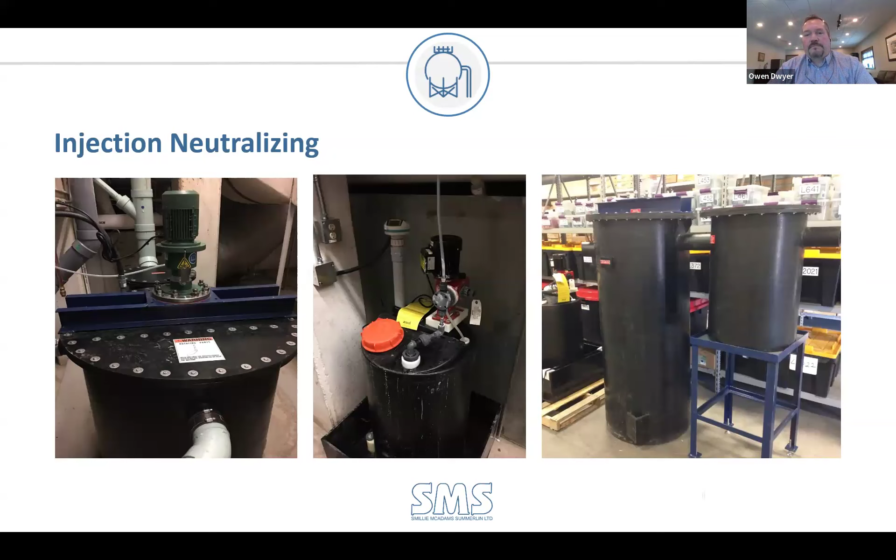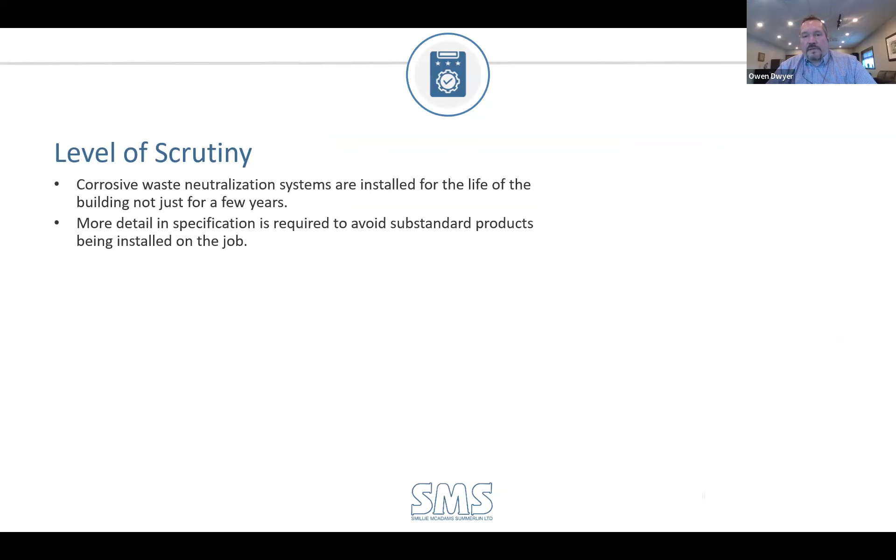Again, some more samples - they could be relatively small and straightforward, or fairly large and complex. The level of scrutiny goes back to the importance of the design and the detail you put into it. These are installed for the life of the building, not just a few years, so more detail in your specification avoids substandard products on the job. An inspector sees this magic box and knows a neutralization system should be there because they've seen it in multiple projects, but they're just ticking a box. They don't know if it's the right size or designed properly - they just say, okay, it's there. Thank you, Mr. Contractor.

Question: should the interceptor get additional seismic restraints on the little stand? It depends on your region - we haven't been involved with seismic restraints, but on the West Coast, absolutely. I don't know what those would look like, whether it's standard bolting to the ground or rubber footings. The sourcing of the stand is one thing - it has to be applicable for the application. I don't know much about what that stand would look like in a seismic application, but if it's a requirement for your region, it has to be considered. Maybe suspending it from the ceiling is the way to go. I'm not familiar with the seismic requirements, but if there is one, you need to have that tank secured down. Normally it would be the addition of lag bolting on the interceptor and neutralizer as well, with fabricated feet so they could be anchor bolted to the concrete substrate.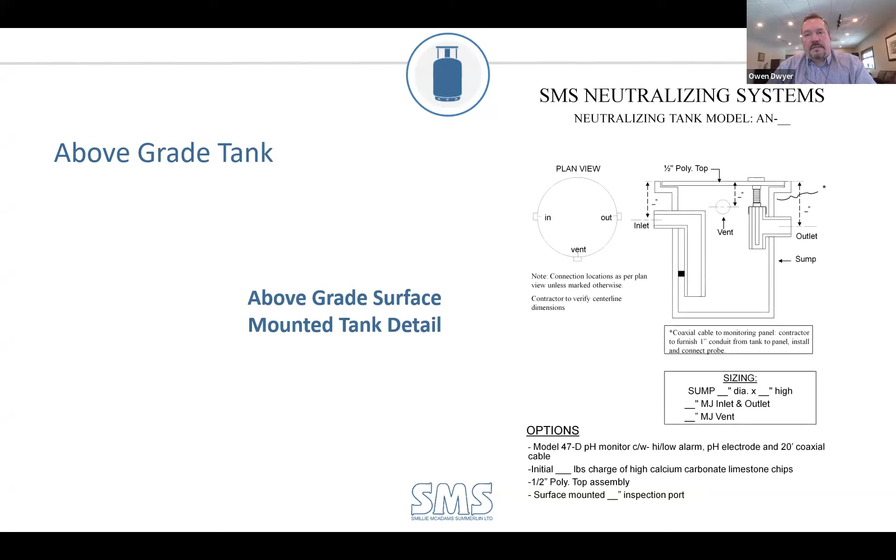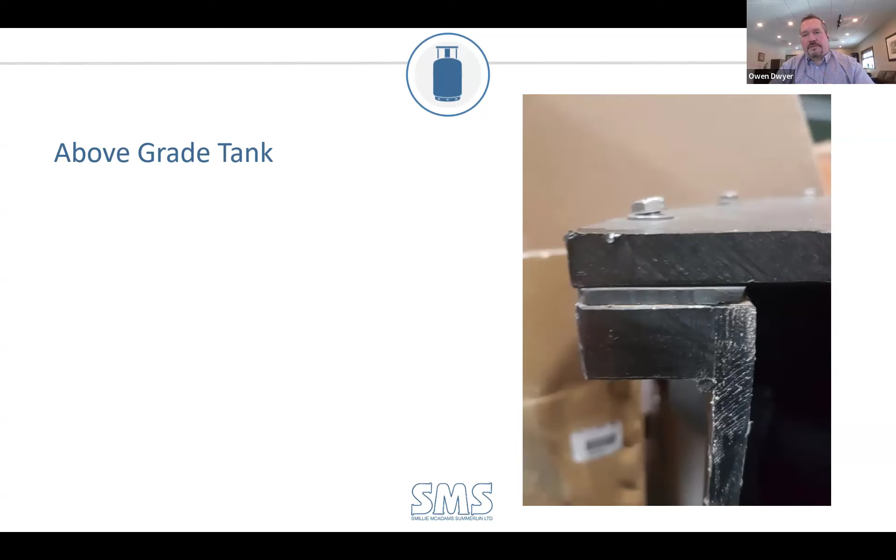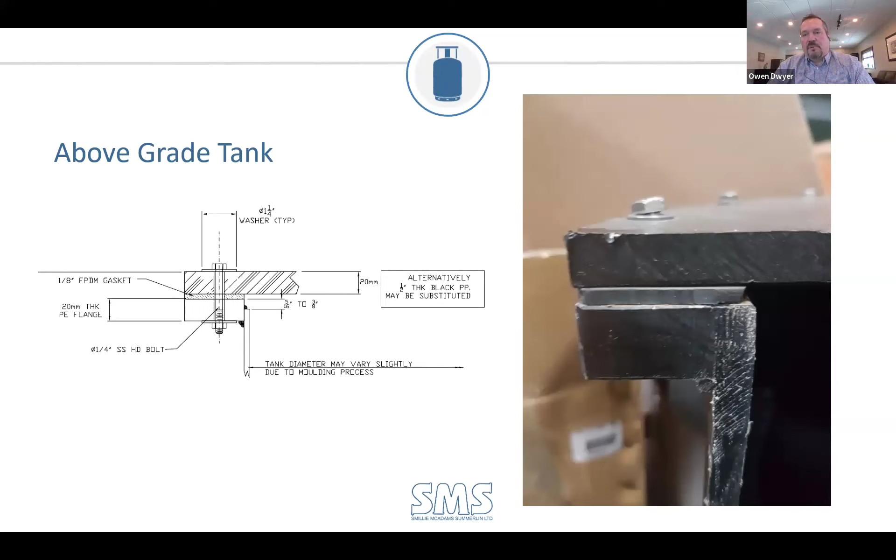Going to go through some of the options relatively quickly. The basic take home: when you're talking about a tank, most manufacturers purchase a rotationally molded tank from a tank manufacturer, saying 'I want a tank that's 36 by 48.' The tank manufacturer doesn't know what the end application is - they're just selling a high density polyethylene tank. It can be non-pigmented, kind of translucent and milky like in previous examples, or black UV with UV inhibitors and carbon black for longer durability. They don't know if you're using it for a neutralizer - the tank manufacturer sells the fabricator a tank, not knowing if you're collecting rainwater, storing dog food, or shipping bird seed. So that tank in its natural form has to be modified to suit the purpose, normally by removing that flange lid or lip to make a proper flanged lid you can bolt with stainless steel bolts and a gasket.

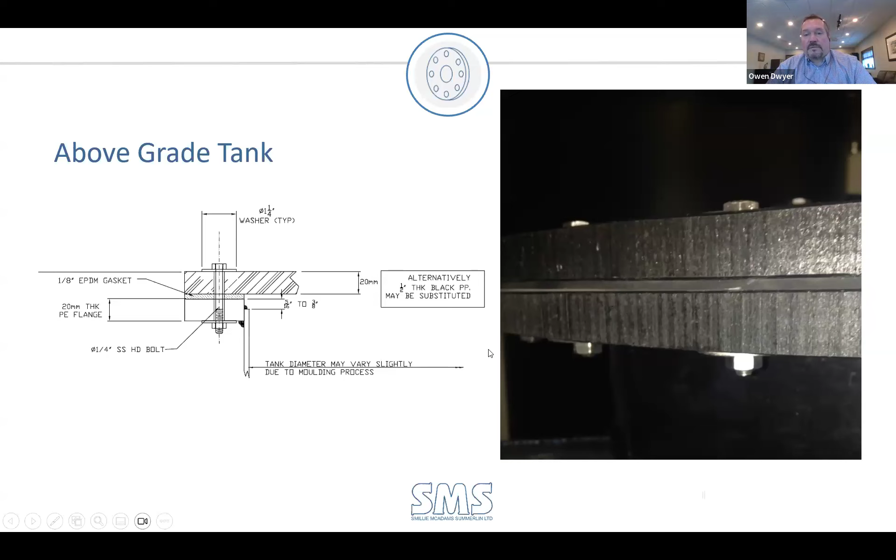For example, taking a pipe wall, cutting it off, welding stainless steel, flange gaskets, O-rings - whatever is necessary to maintain integrity, since you have acids and caustics from the whole facility collecting into this one tank. You want to make sure that tank is robust enough to withstand the rigors of its application. Below grade, you're going to have to beef it up a little bit. The first cutaway was above ground; this is a cutaway of a below grade tank - you have to beef it up for foot traffic. Most applications aren't for vehicles - you'd like to avoid vehicle traffic, but foot traffic for sure.

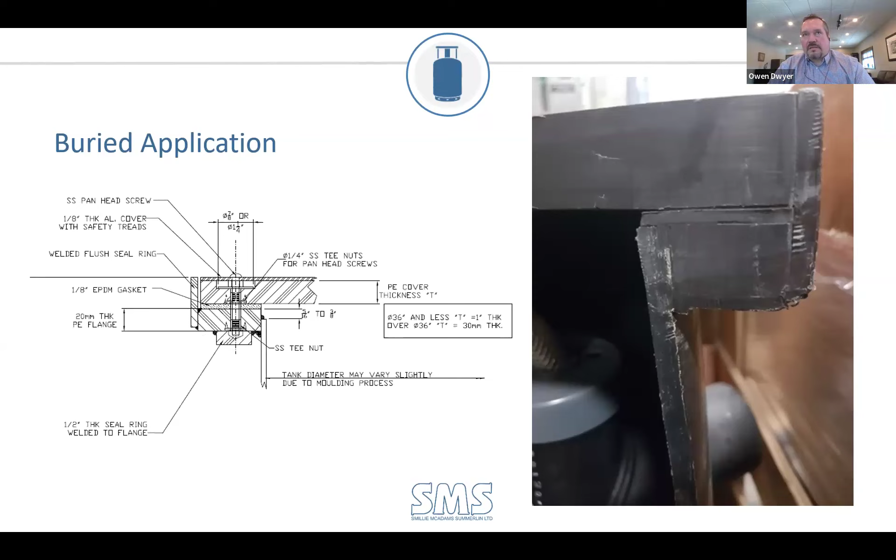With that said, what are you doing with your stainless steel hardware? You're never going to access the bottom of that to hold the receiving nut and washer, so details in your drawings about receiving nuts matter. Some suppliers use what's called a hot sunk receiving nut method - you can see from this image that the receiving nut is welded and permanently fused into the bottom of the tank. Non-skid tops, obviously, for foot traffic.

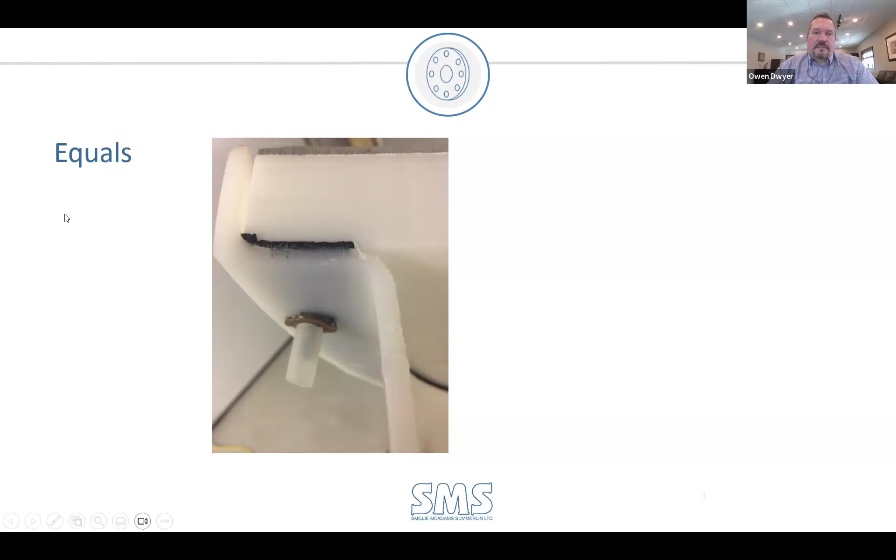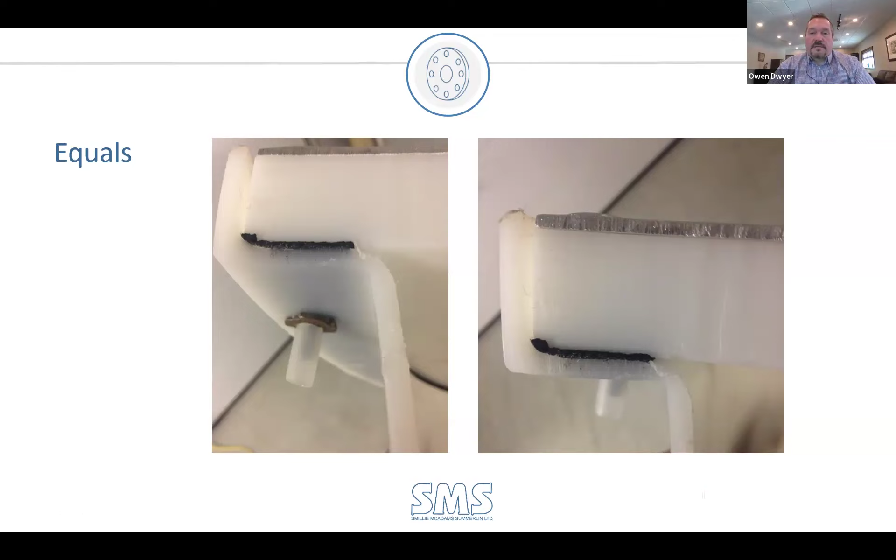This inset here - would you consider this an equal? This image shows the fabricator did not remove the standard factory L-shaped lip the tank came with. In the other examples, it was cut off and, using sheet stock, modified into a big flanged connection. The competition would say, 'we have a 1-inch thick lid, a non-skid aluminum cover,' but how long is this connection going to suit a below-grade application in the facility? The contractor's going to save themselves $1,000 with something like this scenario, and if you've received it without paying attention to detail, this is essentially what you're going to get.

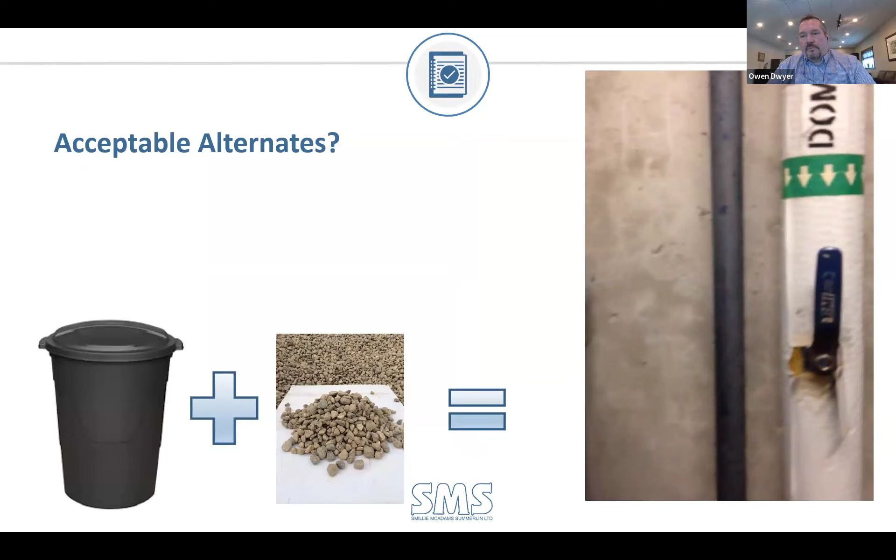So you end up with a garbage can and some rocks in it to do the job of something that's holding corrosive material. The video here shows this copper line within this mechanical room absolutely blackened with corrosive vapors coming out of that neutralization tank because it can't seal properly due to how flimsy that lid is.

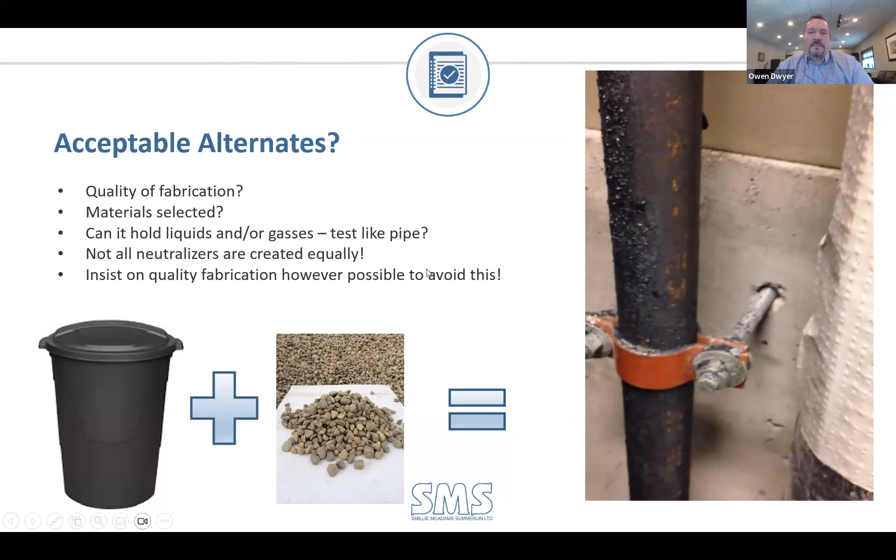So moving on here, can it hold the liquids and gases? Test it like the pipe. Put 5-pound pressure or a head test on it, 12 foot head. Not all neutralizers are created equal, and the fabrication practices, materials selected, all have to be scrutinized by all of us involved. So gaskets, stainless steel, not zinc, empty sumps versus functional capacity. The stone itself, if it's a limestone system, you're not just using any aggregate that you'd get at your garden center. You want to make sure it's a high calcium content aggregate.

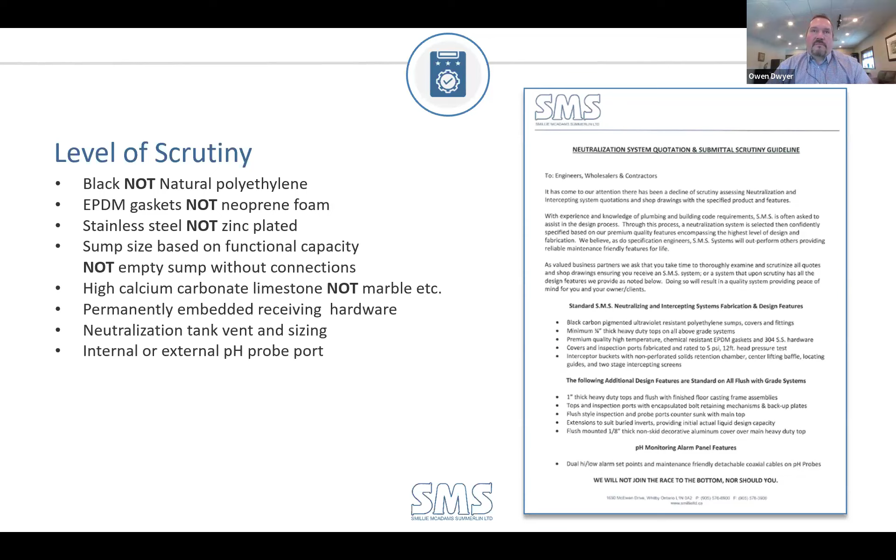Do you need a probe? Or does the client want to monitor that pH? Does it want to have bells and whistles and alarms? Again, venting, all of this has to be taken into consideration.

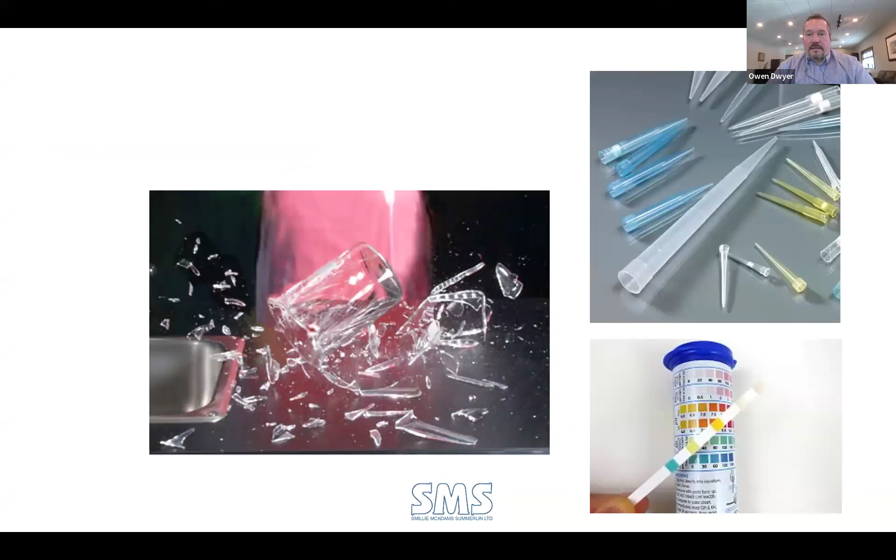Interceptors, just real quick, I'm going to jump into sediment interceptors. Why do you want them? I mentioned again the blockage of this dip tube. What is the blockage typically from? These are the three biggest guilty culprits.

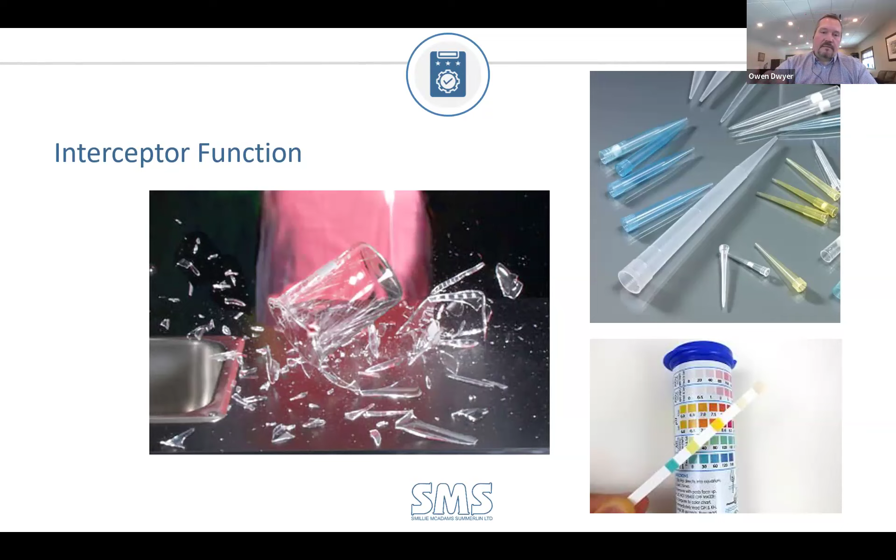Broken glass - you have broken test tubes and beakers in the sink. People will do their best to remove the glass, but you'll always have pieces left that end up down the drain. Top right-hand side, those are called Eppendorf pipette tips. I remember in my lab days, anybody that's a CSI fan, you transfer liquid from one tube to another using those protective tubes so you don't cross-contaminate. And again, pH litmus paper strips - they're in the beaker and inadvertently get dumped down the drain. That's what we're trying to prevent from getting clogged in the system.

And that's how you have to consider it as a system. So you have your interceptors, your neutralizers, your pH monitoring. Is it injection? Is it gravity? All of these things come into play because they're engineered design systems, not a magic box.

Another question - Owen says HDPE burns hot quickly and produces large volumes of nasty black smoke, and is generally not allowed by building codes and the plumbing system. What's the alternative to HDPE? Yes, that's a great question. Again, it has to be suitable for the purpose.

High density polyethylene, similar to polypropylene, is a polyolefin. That's why you'll normally see high density polyethylene selected for the neutralization system. There is polypropylene available. If you're going to specify polypropylene pipe and fittings in your building and you get to a polypropylene tank, it's a polyolefin, and that's the reference in the building code, in the national code, is B181.3.

Alternatively, stainless - a stainless steel tank, fiberglass tank. Really, predominantly what you're going to see is high density polyethylene because of the cost. But again, polypropylene is available. It comes with typically a higher cost and longer lead time. But I have seen stainless steel tanks or lined concrete tanks. There are variations out there.

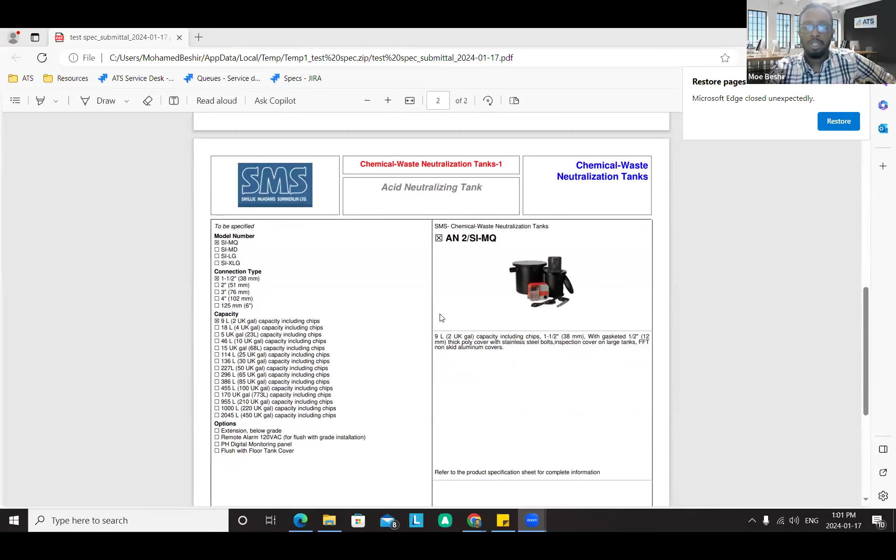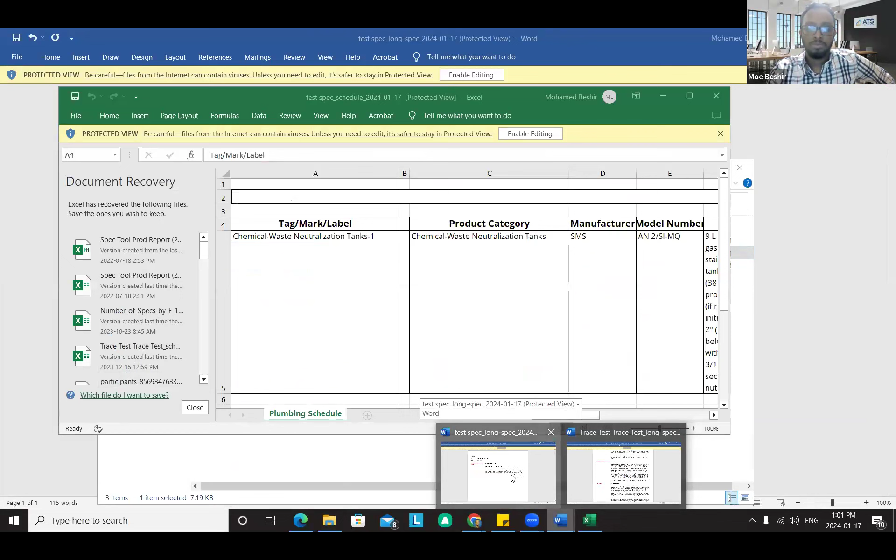All right, there you go. So this is the PDF format, this is your cut sheet for the acid neutralizing tank. We go back, we can get the long spec format as well. And lastly, you can find your Excel format for your schedule as well.

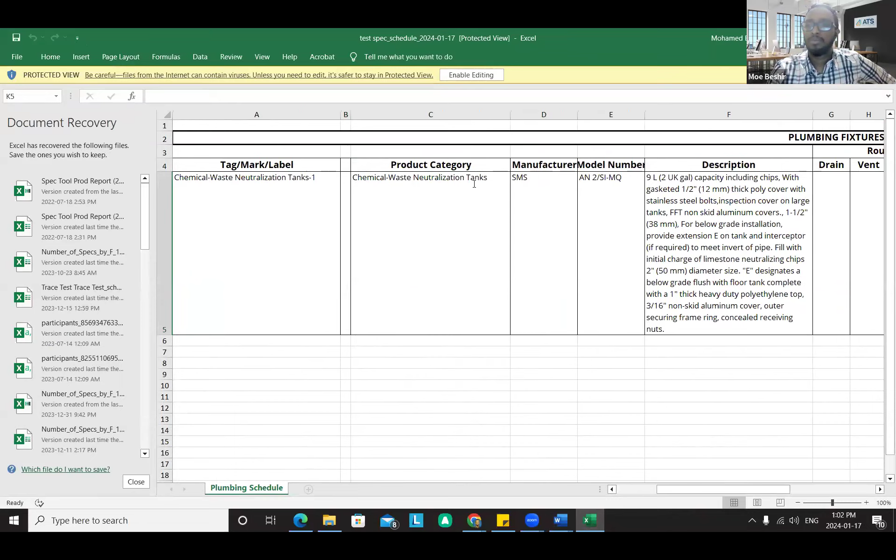See, there's a question. Thanks, Yesenia.

And I think we're right on time here.